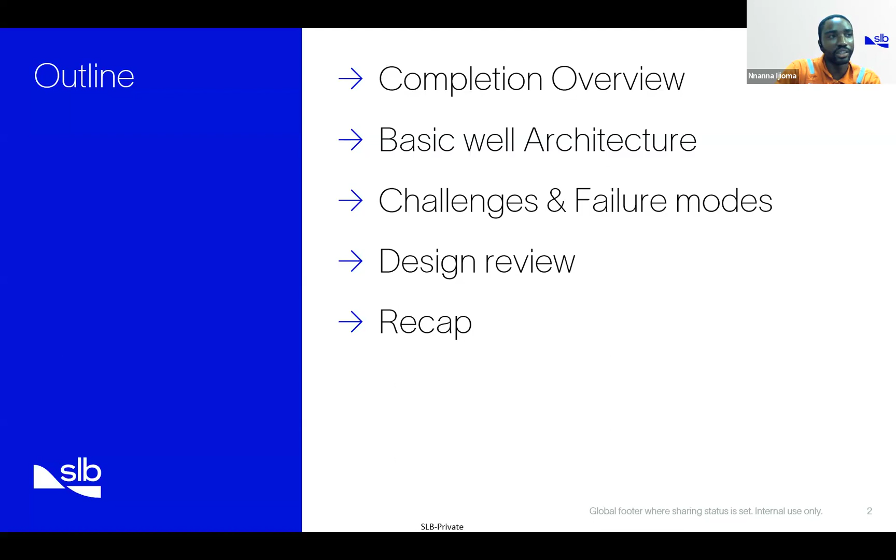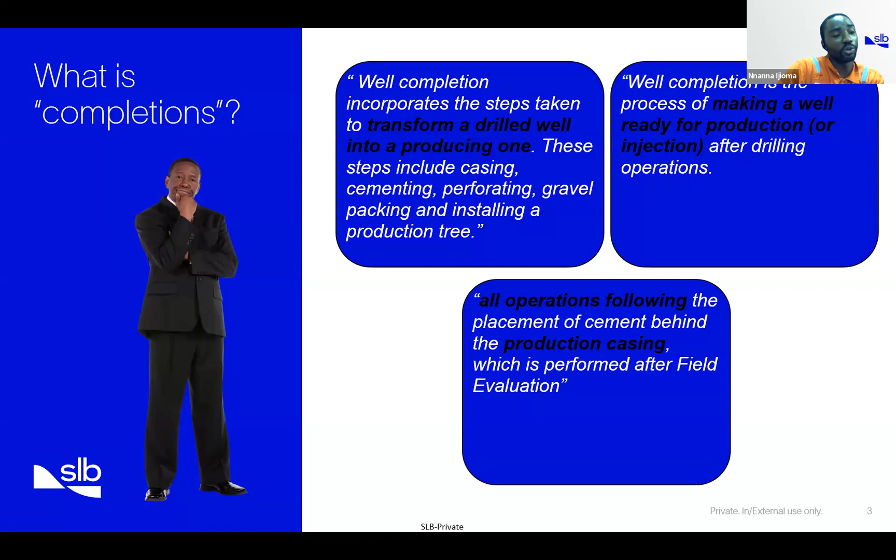So basically, what is completions? If you go online and try to see what completions is, you probably get 100 definitions, but at least you'll see one of these. You could say completion incorporates the steps taken to transform a drilled well into a producing one. These steps include the casing, cementing, perforating, gravel packing, and installing a production tree. Or you could see something that says well completion is the process of making a well ready for production or injection after drilling operations. You'll see another thing that says all operations following the placement of cement behind the production casing, which is performed after field evaluation. Basically, the essence of all of these is that it is the process of getting the well ready for production or injection in a nutshell.

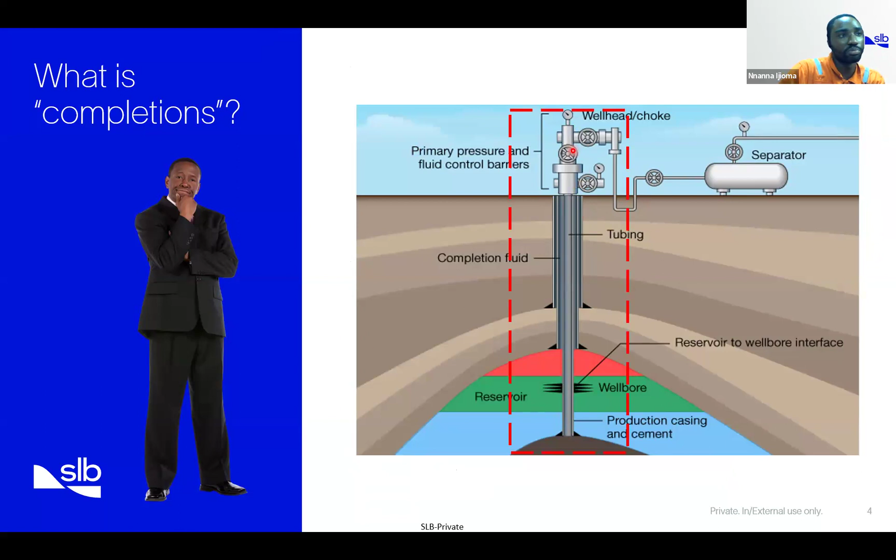So this is the area that we're talking about, all the way to the Christmas tree. The completion does not stop until you've landed the Christmas tree. Then you can hand over to the production team, and they can hook up the flow lines and do whatever they like. Now let's quickly run through a basic well architecture or completion design.

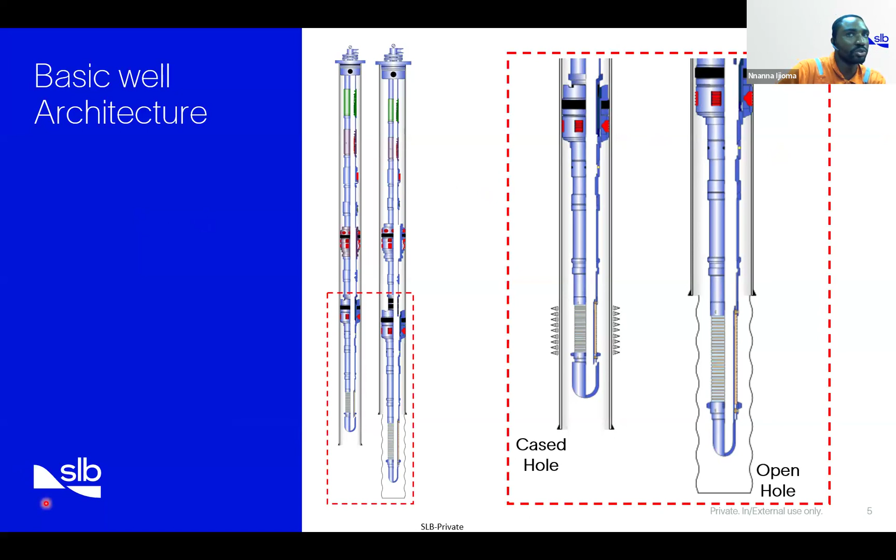Due to this, it could come in different flavors. We could have cased hole or open hole type of completions. Due to the peculiarities involved in installing these completions—because if you want to gravel pack, or do a certain type of treatment across the reservoir or perforation, or the open hole—you would like to separate them into two, the lower or the upper completions. That's what we typically do. You could have various intermediate zones, but in terms of the rudimentary aspects, you can separate it into lower or upper.

So the lower completion is basically your interface with the reservoir. At this point, it gives you the opportunity—if you want to do a gravel pack, stimulation, a frac pack, pump a micro emulsion breaker or mud solve—to treat your reservoir. This is the opportunity that you have in your lower completion.

So that's why your lower completion is your interface between your well bore and the reservoir, okay? While the upper completion is now the interface between your lower completion and the surface, or your Christmas tree.

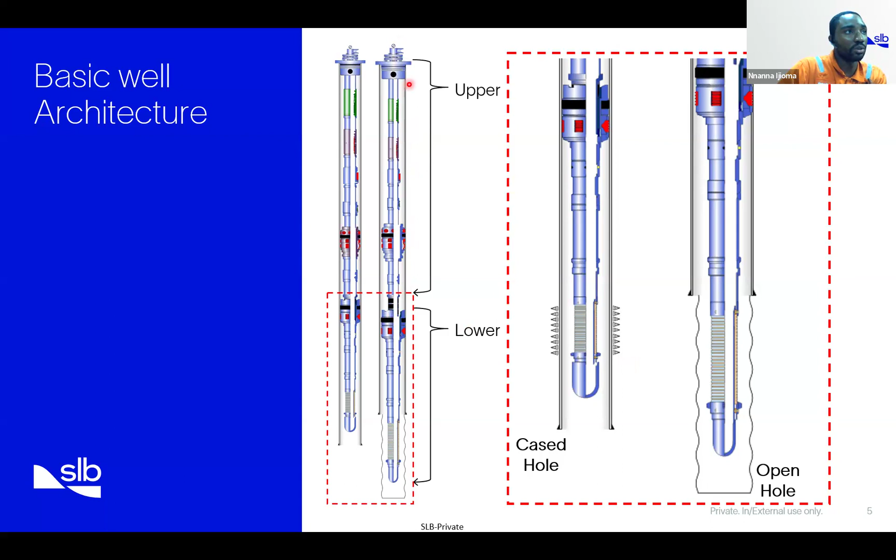Typically you would have things like packers in your lower completion and screens. In your upper completion, you have things like nipples, injection mandrels if need be, gauges, sliding sleeves, safety valves, and definitely a tubing hanger and Christmas tree.

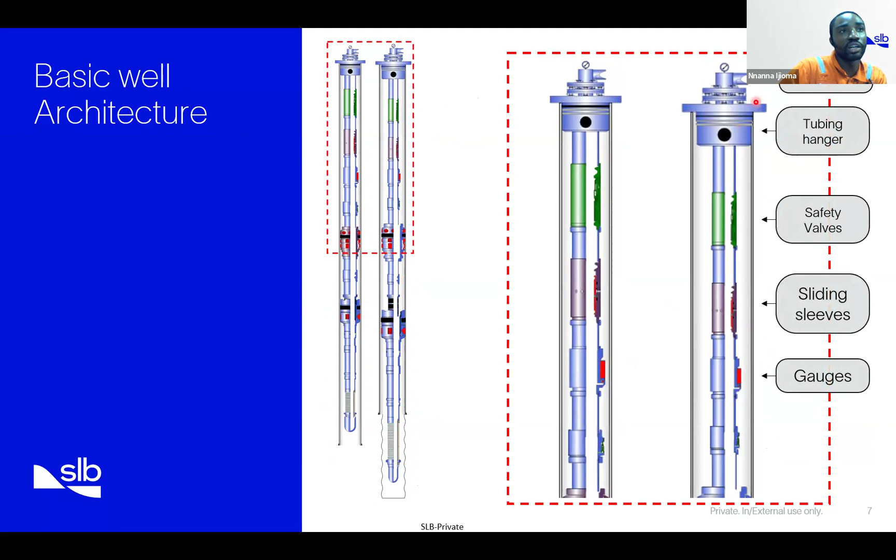Now that's for a basic completion design. But in the process of designing and deploying, or probably undergoing intervention in any completion operation, what are the potential challenges and failure modes that we could actually see in this process, and what can we do to prevent this?

So now, to make this easy, I've split it into 5 segments. Either you're planning to complete a well, or you are at the installation phase of your well, or you are at the production phase of your well, or you are trying to intervene in the well, or you're probably trying to decommission or plug and abandon your well.

So the idea of this presentation is that hopefully everyone on this call will be able to take out 1 or 2 things that will help them at each stage of the completion life cycle, okay? And so we can just get straight to it.

Now, for the planning phase, what happens? Maybe the geoscience team informs you of their intended production strategy. They've told you the economic conditions of the company, and they've also told you what they stand to gain or what they probably stand to lose.

So they've told you how they would like to isolate these zones. Let's, for sake of argument, assume that this is subsea, like deep offshore. They also told you the anticipated reservoir fluid characteristics, and the rock mechanics that they anticipate, whether it's unconsolidated or consolidated sand, etc.

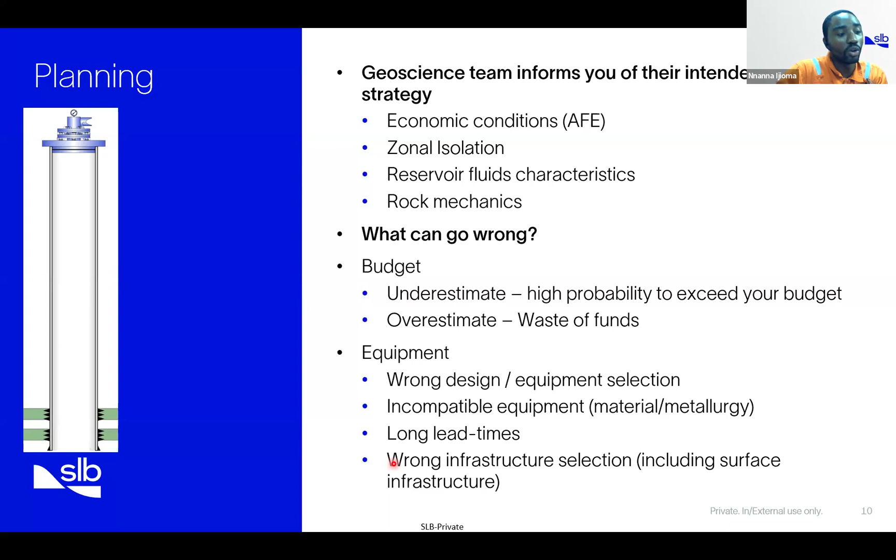And if that is the case, then you probably damage all the equipment and everything is just going to be a waste. So what can we do better at this stage?

First of all, you need to have a design review with all the parties involved. You need to ask the right questions, select the most feasible and accurate or adequate design. And when I mean adequate design, you need to make sure you have the right information.

I'm talking about your reservoir information, core sampling information, your DST, because you need to know whether you are anticipating a high water cut or high sand production. So you know whether you are probably going to gravel pack or go with a standalone screen, or deploy inflow control devices.

Next is your tubular design and analysis review. You need to be sure that your completion envelope can accommodate all the activities you'd like to do during the life of the well, because if you exceed this, you would actually have some failure on your well.

Then you need to look at installation efficiency. This means looking at how long it will take you to deploy what you want to deploy, and if there are faster ways to do what you actually want to do. We'll talk more about this during the course of this presentation.

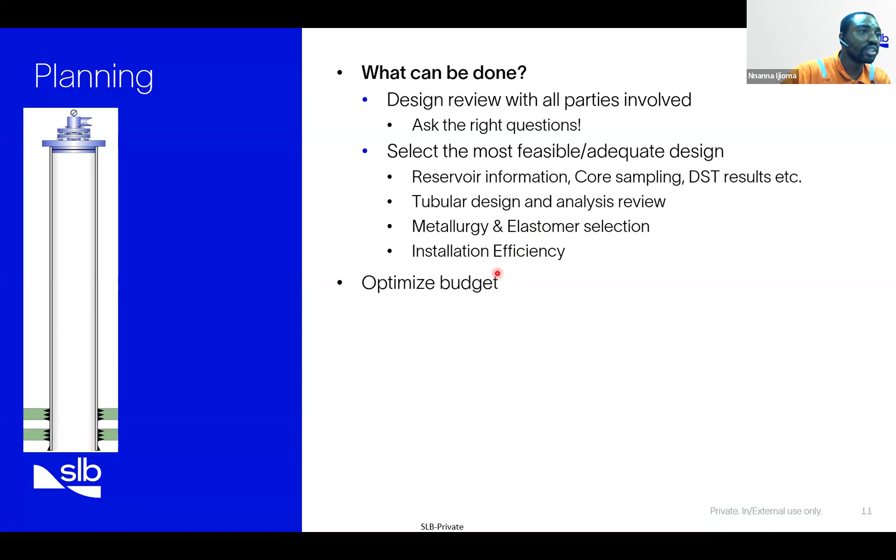Next is your equipment checks. You need to order equipment on time in the right quantities, and then conduct system integrated tests if need be at the design phase, so you know if things are compatible in the first place. You also need to check the kind of companies that need to render a certain service, and encourage the vendors to conduct rig visits where applicable.

So the moral of the story here is: do not rush, because at this stage it's actually very, very critical. Everyone knows that a lot of times we spend a lot of time planning the job. You could actually use a year to plan a job that's probably going to take you maybe a week and a half or two weeks to execute.

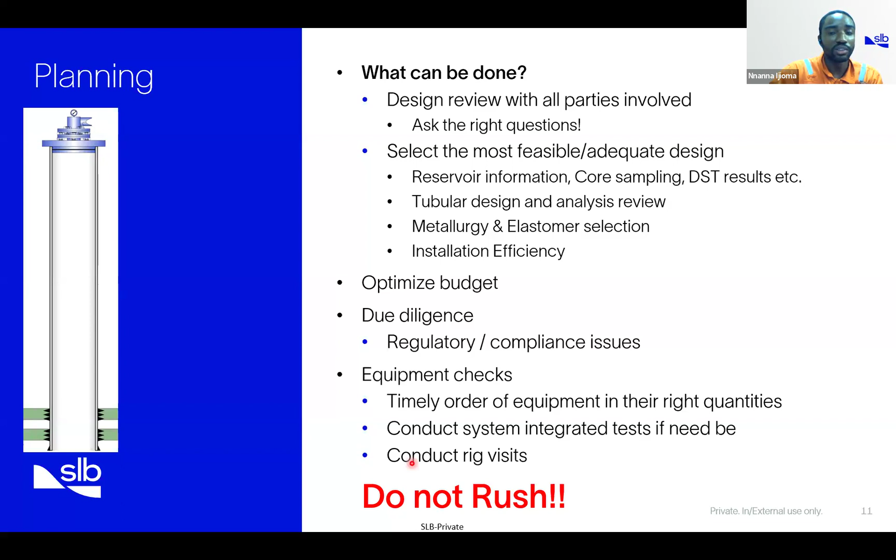So now let's move on to the next stage. You have secured everything - all your resources have been secured, your rig, your completion equipment, your vendors. At this point, what can go wrong? First of all, loss of lives and property. Safety is everyone's priority, and things can actually go wrong at this stage.

You could have stuck tools, you could have formation damage if you select the wrong tool and if your procedures are actually wrong. You could have cases whereby you do not even have a contingency plan available. So let's say your primary plan was to set the packer with a trip saver mechanism, a hydro trip, a formation isolation valve, and it just fails - so what do you do? Do you have a backup plan in place? You need to make sure your design takes into account that kind of scenario.

Another thing that could probably go wrong is your tool might damage in transit, or it might even damage during deployment. And then another thing that could happen is a dropped object in hole. In fact, all these things could probably even lead to you junking your well, so you've just wasted a whole lot of money. Because before you even complete a well, you must have gone as far as drilling it, and you've spent a whole lot of money. So at this point, you do not want any of these things to happen to you, because you could waste all of that time and money.

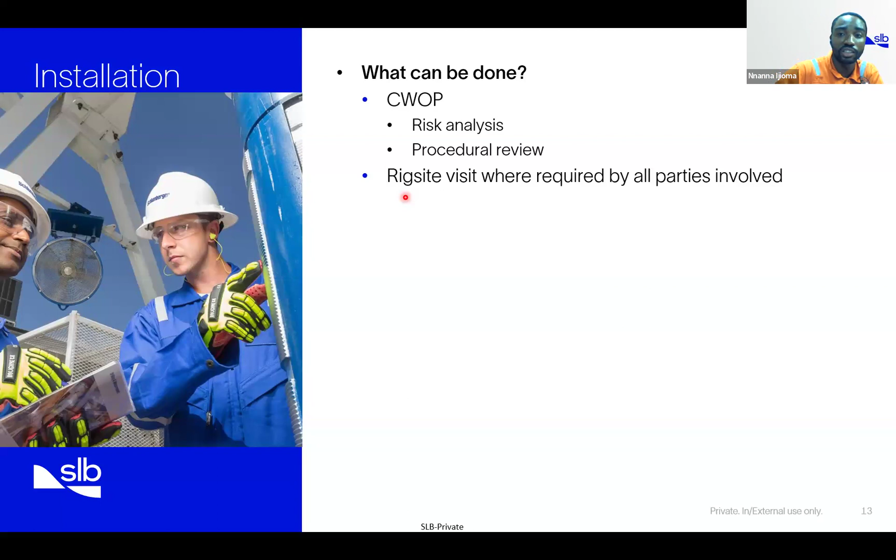Now you need to select the right service tools by assessing the impact of each tool on the performance of flow assurance of the well. There are tools designed for you to use in a cased hole setting, and there are tools designed for use in an open hole setting. You would not like to use one for the other, because you could end up damaging your formation. In fact, sometimes you could even end up having a stuck tool again. You do not want any of these two.

Next thing you should do, you should have robust plans to have backup equipment in place. Not just backup equipment, backup personnel.

Next thing, you should ensure you have adequate time allocation for equipment preparation. You don't say, okay, I want to complete a well in a month, then you go start engaging all the vendors 2 weeks to completing the well, right? We are trying to complete a well here, we are not trying to sew cloth for a wedding. Even if you want to sew cloth for a wedding, you don't engage the tailor 2 days or a week before then, right? You engage them. Some people go as far as maybe 3 months before the wedding. So if you could do that for a wedding, for an event that you're just going to sit down and eat and drink and enjoy yourself, why can't you do that for this kind of situation?

So the moral of the story here is you need to ensure you have adequate time allocation for equipment preparation, okay? Another one is you need to ensure that you have a clear and documented communication channel, all right?

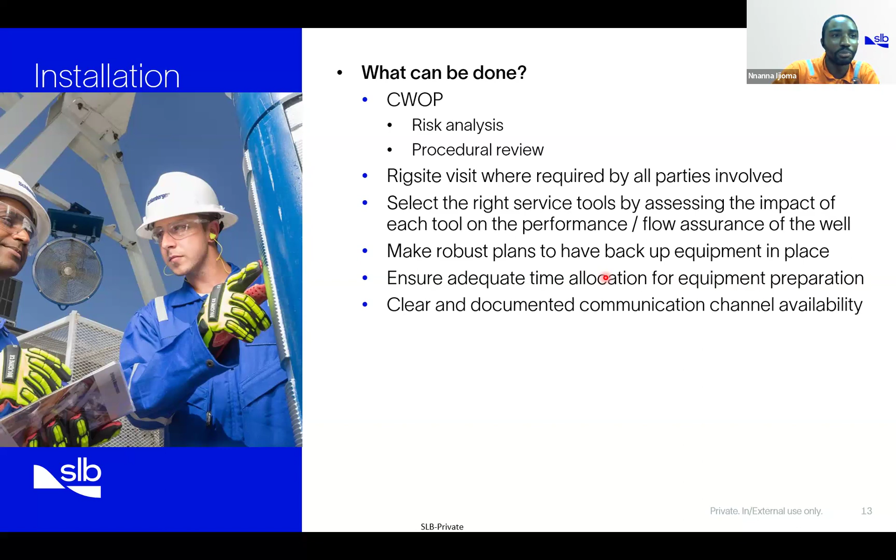Because information at this point is very, very critical. So if you have PSD results, you would like to share this with all the parties involved. Let them know all this information, so they select the right type of screen, right?

Or maybe if you're expecting high pressure in a certain operation, do not isolate all the vendors from each other. Let all the vendors talk to each other, because maybe, for example, you have an operation that will need you to pump in 5,000 psi in the string, and then you're mobilizing equipment that can only give 3,000 psi. So do you shut down the rig just because a cement unit cannot provide up to 5,000 psi? So you would like to know all of these things way ahead of time.

Now another thing is to ensure that all associated records are available and well documented. Again, I'm talking about the things on the rig, your drill pipe specifications, tubing specifications, equipment specifications, pumping equipment specifications, right?

So for example, the reason why your drill pipe specification is actually important, because if you're going to do a gravel pack operation, you would like to know how many barrels you're going to pump for proppant to get to where you want the gravel packing to actually happen. Just to put things in simple terms, if you get this wrong, believe you me, you could seriously and heavily jeopardize your operation. And this is just at the installation phase.

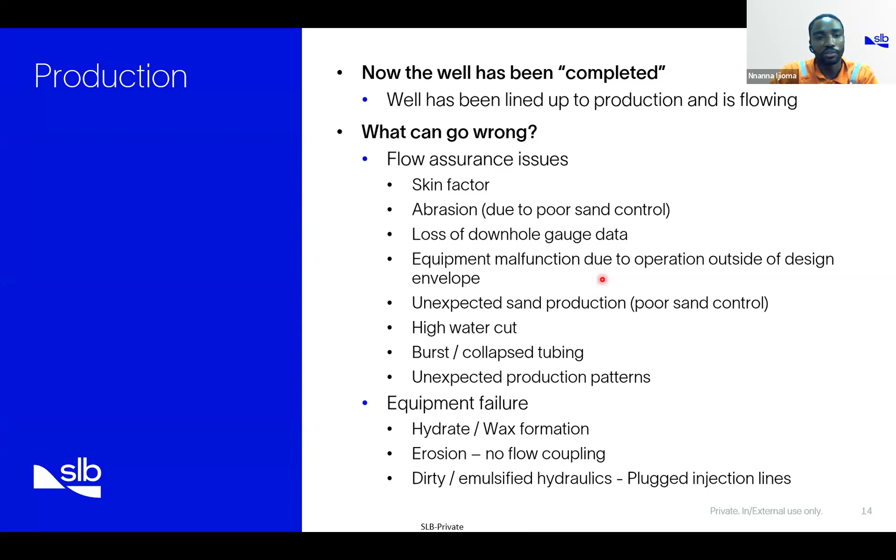So now, let's even go to the production phase. Now you've completed the well, and at this point everybody's happy, they say congratulations, everything is nice and good. So what can go wrong at this stage?

First of all, flow assurance issues, right? You're talking about your skin factor, something like this. Because of the things that happen during the installation phase, there's a high tendency for you to contaminate the contact area between the wellbore and the reservoir, basically your lower completions. And if you do not use the right tools or do the right things, you would not be able to mitigate these things.

So we have things that would help you mitigate these things, but maybe you need to just pump acid or like a mud solvent, things that will help you dissolve the mud, the filter cake, and all of those things. If you do not do that, you're going to have a high skin factor. And for those who are not really conversant, I'm basically talking about things that would restrict the flow of effluent into the wellbore and up the string.

So at this point, you'll be having, like, you see where my laser pointer is, things blocking the pores, and you do not want that, right?

And reducing permeability. Another thing that could probably go wrong is abrasion, probably most likely due to poor sand control, which could lead to pipe failure on surface.

This is just an example of what can actually happen on surface, especially at elbows. And if this can happen on surface, just imagine what's going to happen downhole.

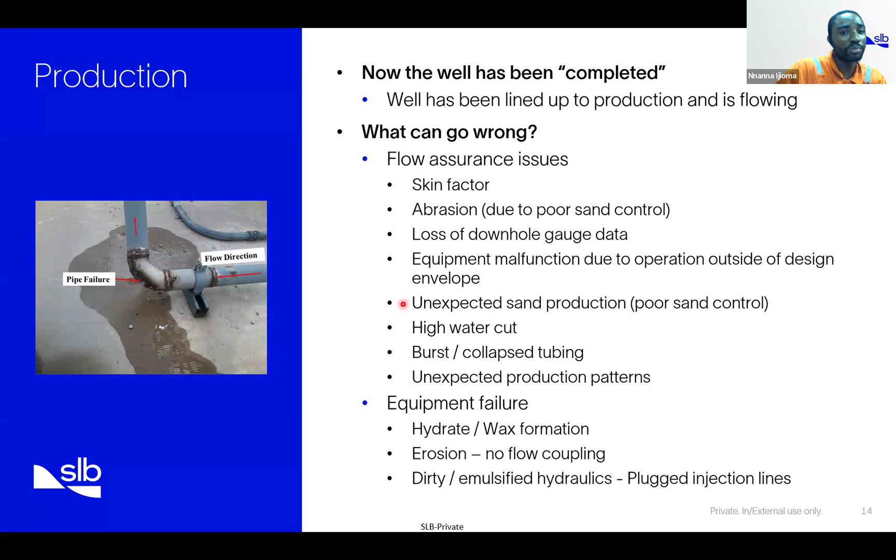You could probably have hot spots downhole, and then you start having irregular production patterns. Another thing that could happen is ballooning and reverse ballooning, which is actually inevitable, but these tubing movements will lead to equipment malfunction due to operation out of the design envelope.

You could also have loss of downhole gauge data, unexpected sand production, and then you could also have hydrates or wax formation.

So this is basically what it looks like. If you anticipate these kinds of things, there are procedures or things you could put in place to prevent them from happening, and we'll talk about that in subsequent slides. So you can take some time to digest this slide again, then let me run through it.

So you could have a high skin factor, abrasion due to poor sand control, loss of downhole gauge data if you have a downhole gauge installed in your well, equipment malfunction, probably a high water cut because you never installed an ICD device. You could have a burst or collapse tubing, equipment failure, erosion, or probably dirty or emulsified hydraulics.

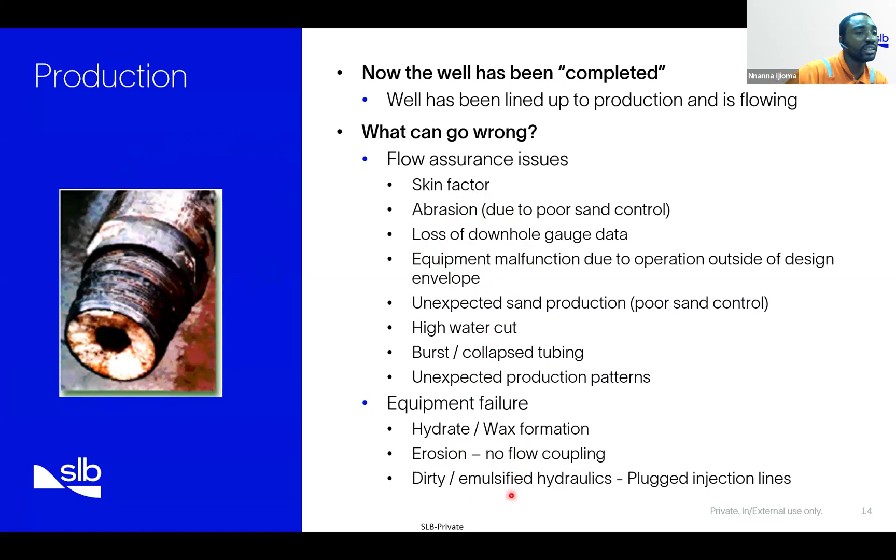Now, what can you do at this stage, or before this stage rather? First of all, make sure you have a robust completion design.

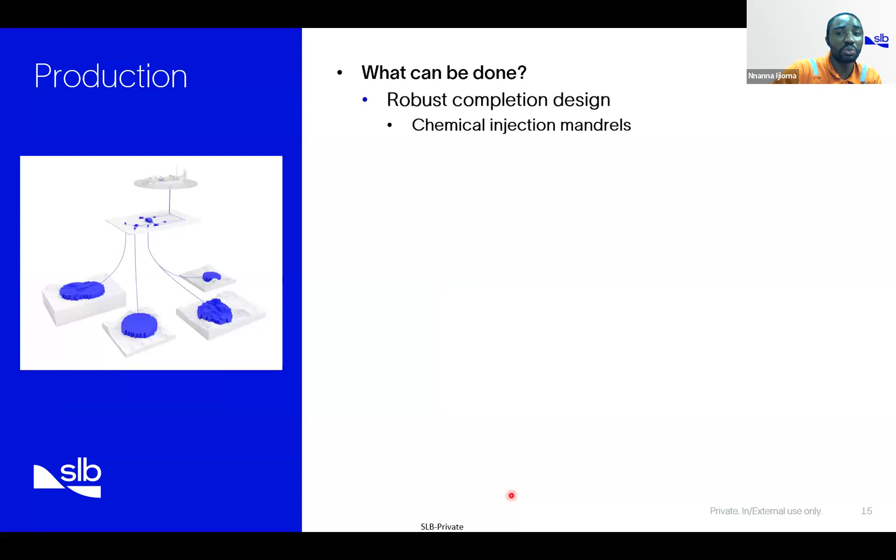Do you need to install chemical injection mandrels? Do you need gas lift mandrels? Ensure you have a robust installation procedure, and ensure you do a thorough wellbore cleanout.

And as part of your robust completion design, ensure you do a tubular design analysis. So you need to simulate what is going to happen at every point in the well. During installation, you need to simulate what's going to happen and how that is going to affect the other equipment in your well.

In fact, you need to also simulate what's going to happen during gravel pack when you screen out. There's a very high tendency for your screen out pressure to be very high, and that could actually collapse the other equipment you have above your screen. So you actually want to factor in all of these things.

Now you also need to look at your intervention and plan for these things. You need to function your downhole tools as required. Things like safety valves need to be functioned regularly. You just don't leave a well to flow and leave the safety valve open for years without functioning it.

No, you actually need to plan and schedule, let's say, an interval where you go check that your safety valve is working, that your downhole flow control valve is doing what it's meant to do, and so on and so forth.

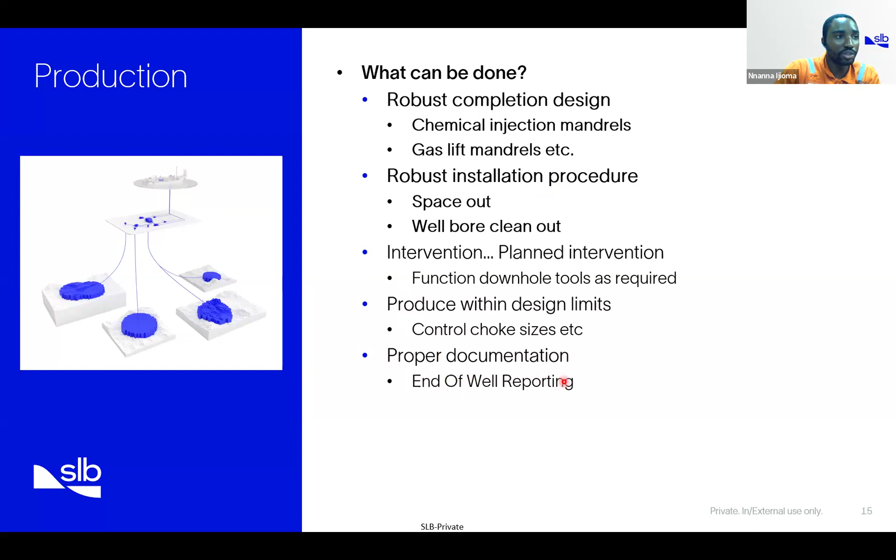Now this leads me to my next point, which is proper documentation. You need to be sure that all these things are well documented in your end of well reports, because you can only know that there is even a design limit if there is a record showing that there is a design limit.

You can only know that there was a restriction while going in hole if there is a record showing you that. So you need proper documentation. And last but not the least, you need to make sure you have the right security measures. An example is us here in Nigeria - I can tell you for a fact that we've had cases where some people's Christmas trees have been stolen. Christmas tree, as heavy as it is, can get missing. The same way you hear that a snake has swallowed some money, you hear that someone has swallowed your Christmas tree. So you need to make sure you have the right security measures in place.

Okay, so now let's talk about intervention. Intervention can happen at any stage during your installation or after. So at this point, what can actually go wrong? You could have a whole lot of NPT if you do not prepare. In some cases, you might have completed the well - it might be an old well, but you might have insufficient well information. And if you have insufficient well information, this might lead to a stuck tool, because intervention is not just wireline or slick line - we're also talking about coil tubing. You could have a stuck coil tubing BHA in hole, a stuck wireline BHA in hole, a stuck slick line BHA in hole, and you don't want any of these things to happen to you.

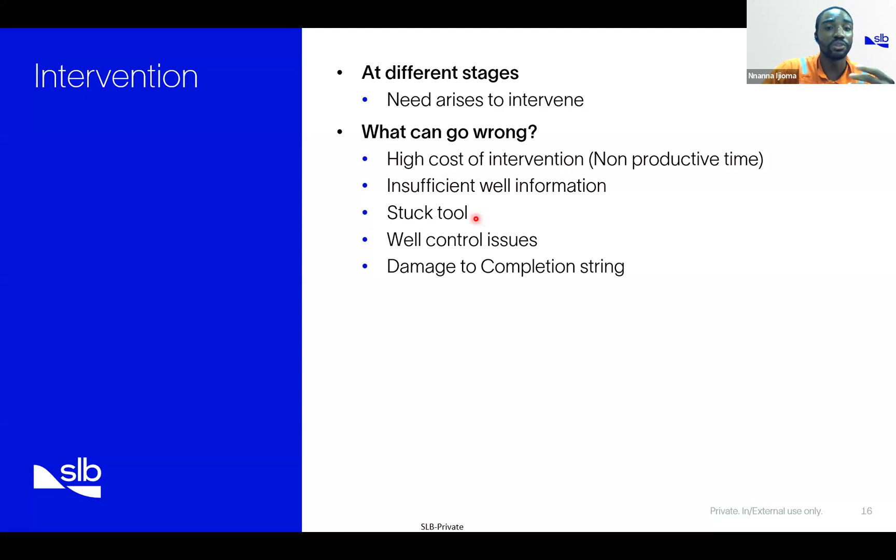You could also have well control issues, or maybe damage to your completion string. But at this point, what can you do to prevent any of these things from happening?

First of all, make sure you have a robust intervention design. Select downhole tools which require little to no intervention, if possible. Ensure the well is designed to accommodate all anticipated intervention operations. And then you also try as much as possible to have a robust intervention procedure. First of all, you need to always perform a drift run before anything. In fact, you'd prefer to even lose a gauge cutter in hole than lose an entire stimulation BHA in hole - you don't even want that.

You also need to expect the worst and plan for the worst. And then, again, ensure you have a proper end of well report.

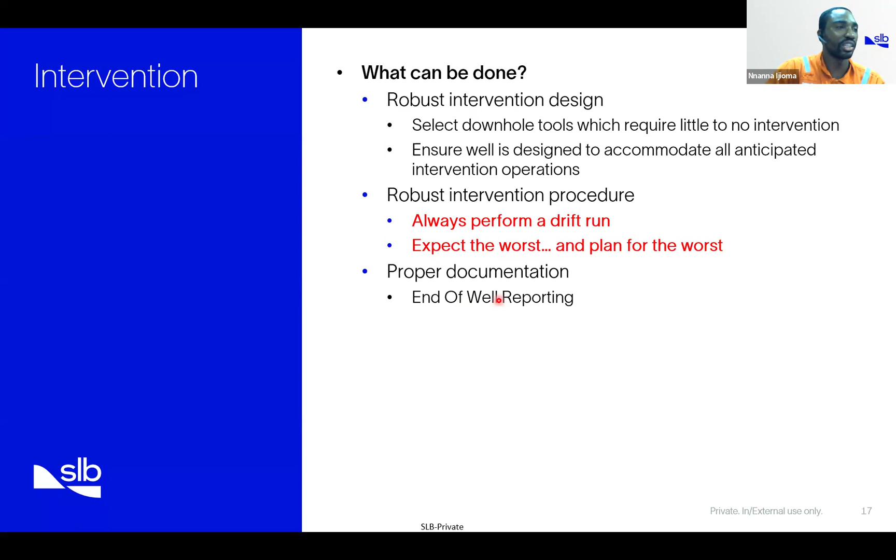Now, after you are done with your well, you have exhausted everything you can get from that well, you are in the decommissioning phase. So now there's a reason to decommission the well - you need to plug and abandon this well. So what can go wrong? First of all, well control issues. As funny as this may seem, you might even exceed the decommissioning budget. And there's also a risk of having a stuck tool again, or you could probably even have seepage after your plug and abandon operation. So what can be done at this point?

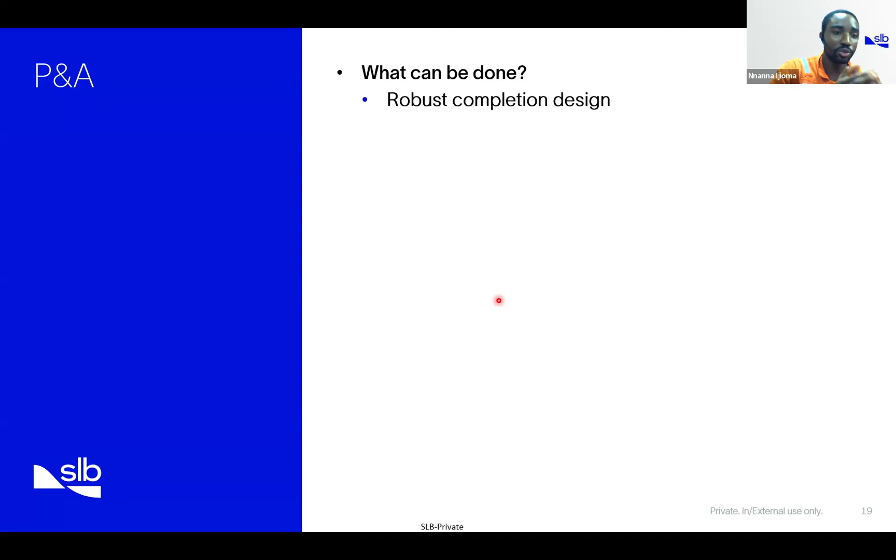First of all, make sure - and this is me repeating this again - make sure you have a robust completion design. Sometimes you can design your well in such a manner that it will be easy to decommission. These are things we are going to look at when designing our well in the upcoming slides. Next, make sure you probably introduce a failure point in the well, so that when it's time to decommission, you can either shear that part out of the completion tubing string, or go out there with a BHA, tag that setting point, fire some guns or an EGC, and pull out of hole the remaining BHA.

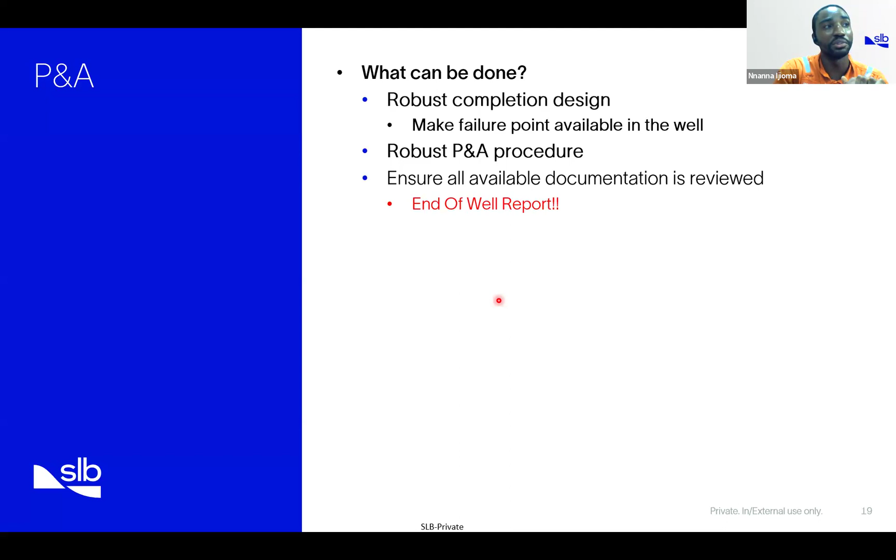Make sure you have a robust plug and abandon procedure - again, similar to having a CWOP. You need to do something similar in this operation where you come up with a procedure that helps you account for all of these things. And last but not the least - this should be the new national anthem now - ensure you have your end of well reports, and ensure all available documentation is reviewed before the operation. In fact, before the intervention operation, ensure you review all available documentation.

Now, let's try to design our well. Remember previously they told us that they wanted to complete a well deep offshore, and they have 2 zones that they wanted to complete, which are not so far from each other.

So first of all, you could do something like this. If this is not so visible, let me zoom in so you can see. You could just run a single string, right? This would be our option 1.

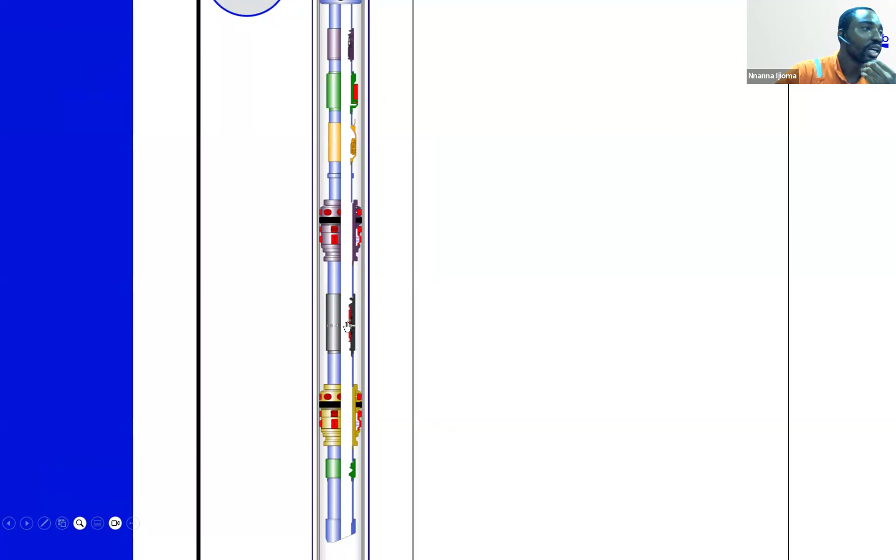You could run in hole, set a packer. You're going to have a packer here, a packer here, introduce a nipple here that enables you to have a closed system and set these 2 packers at the same time. Then you put a sliding sleeve which enables you to access the formation over here, and the lower formation will flow in through this flow port here. So now you have selective production, right?

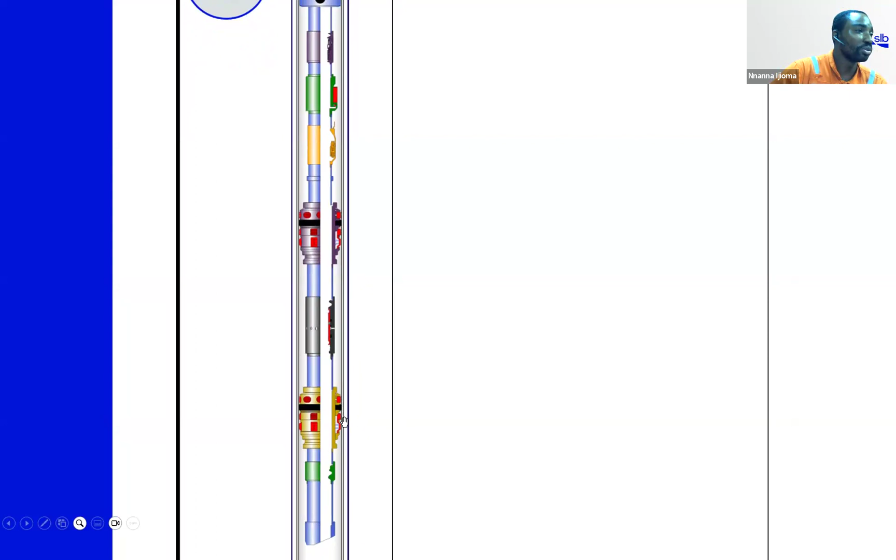But the reservoir team or geoscience team has also told you that they expect sand production from here. So you cannot even gravel pack in a single trip. I mean, it's not that it's not possible, it's actually very possible, but you do not even want to do that. Because if you do something like this, believe you me, it will be a nightmare. It might be quick to deploy, but when it's time to produce this well, it's going to be a very, very serious nightmare because you will start producing sand.

And even if you start producing sand and it's time to decomplete this well, and you want to pull out this completion string, guess what? You're going to have problems because now this packer here might even get stuck because of sand. So you want to do something that is more robust.

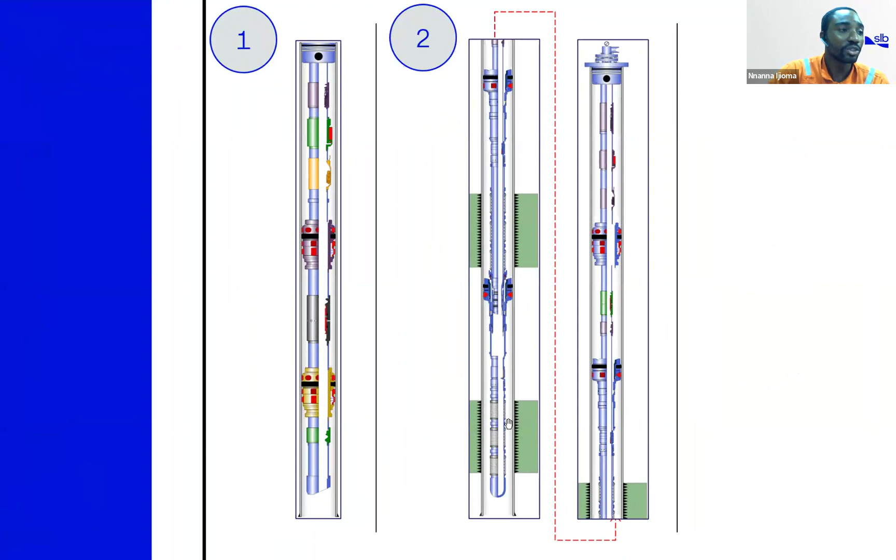Let's take our option 2. In this case, we are going to introduce a lower completion BHA, which alludes to my previous slide, where we try to separate the upper and lower completion because we want to do a gravel pack. So now this is what our BHA, our completion BHA, now looks like. Let me zoom in a bit so you can see.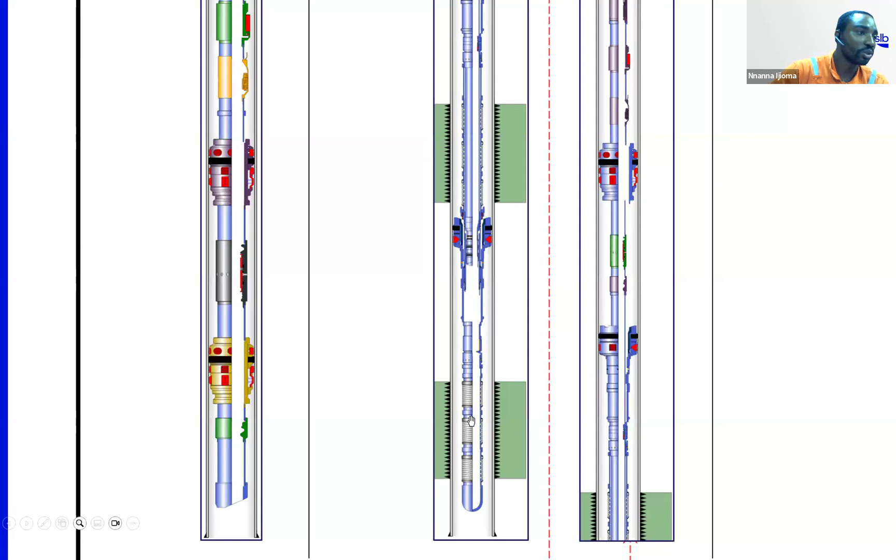So we're going to have a packer here, right? With this packer BHA, you're going to have a bull nose here, leaving some rat hole. At this point, we are not even sure how long our rat hole will be. So now we set this packer, do our gravel pack operation, come in with the upper zone lower completion BHA. We sting into this first lower completion BHA. So now we're going to have a stacked lower completion, like a 2-zone lower completion. Then we do our gravel pack, right?

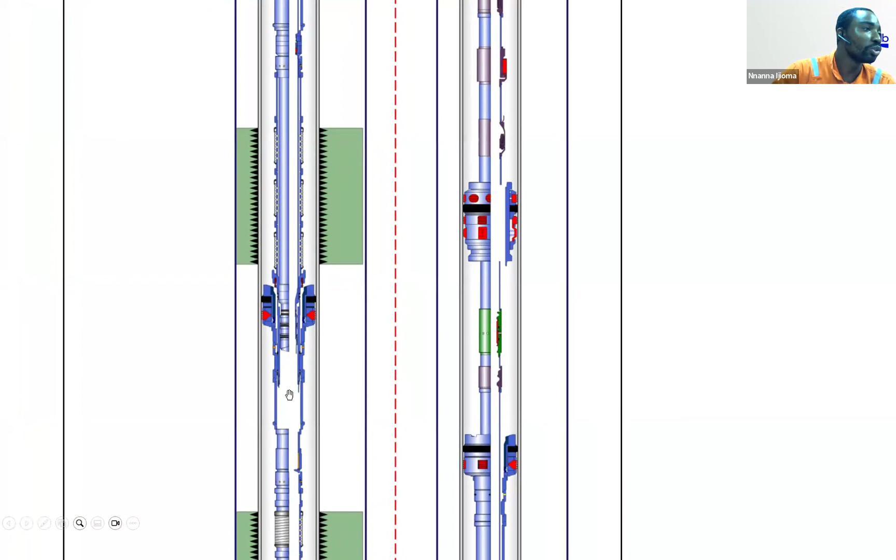And then we come in with our upper completion BHA, which is almost similar to the first iteration. In this case, we would like to either produce from this zone or this zone. So what do we do? We come in with our seal assembly, sting into our LZMSA, lower zone multi-seal assembly, which enables us to produce from the lower zone. And then this upper zone will now flow into these screens, into the microannulus between the tubing and these screens, out of this larger microannulus and all the way to this sliding sleeve.

But at this point, it's going to be blocked. Just for the sake of illustration, let me zoom out and use my pointer so people can actually see what I'm talking about. If you follow the red pointer, the lower zone will go all the way up here into this point, coming through here, then go up to surface, while the upper zone will come into this point, come out of this annulus here, then try as much as possible to go into this sliding sleeve.

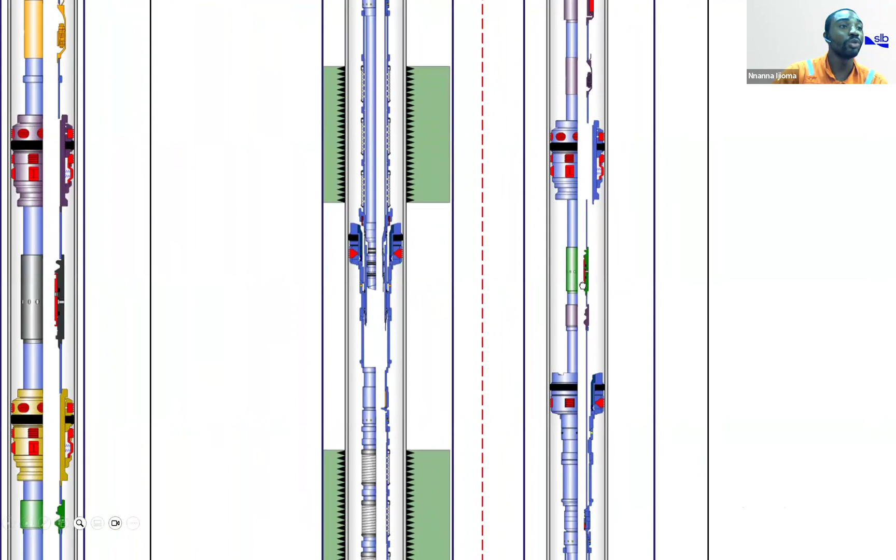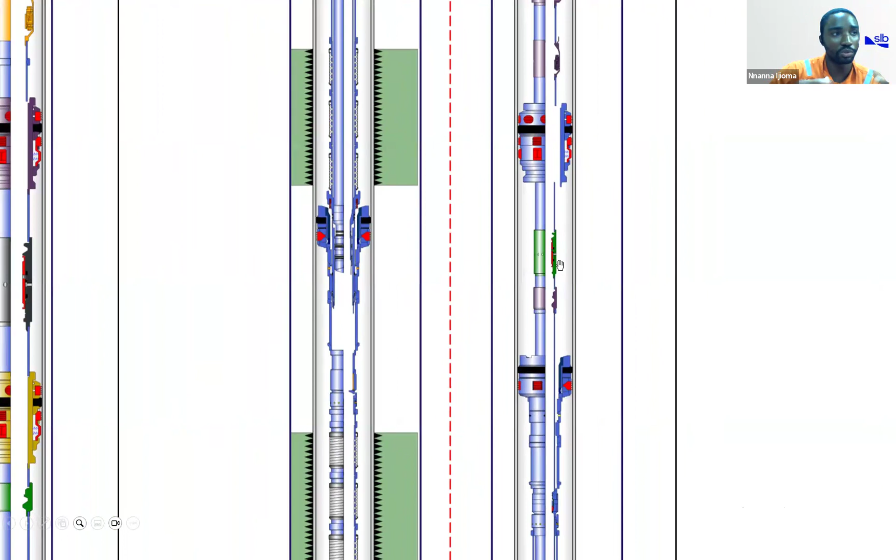But it wouldn't be able to, because the only way you can do that is if you call slick line to come and shift it open, for the fluid to come into the string. But we are in Nigeria, you can't do that. You can't commingle. And even if you want to do that, you first need to come in with a plug, set it in this nipple profile here, and then shift open this sliding sleeve so you can have production. In fact, you need to then put a separating tool in the sliding sleeves, then have selective production.

But then again, you are in a subsea environment. You don't want to be calling slick line, calling a drill ship just because you want to have selective production. We can actually select a device that will limit or reduce the number of interventions required in this well. So we can come up with a third iteration, and we can also use this to reduce the number of runs in our lower completion BHA. So now we have modified it to have something like this.

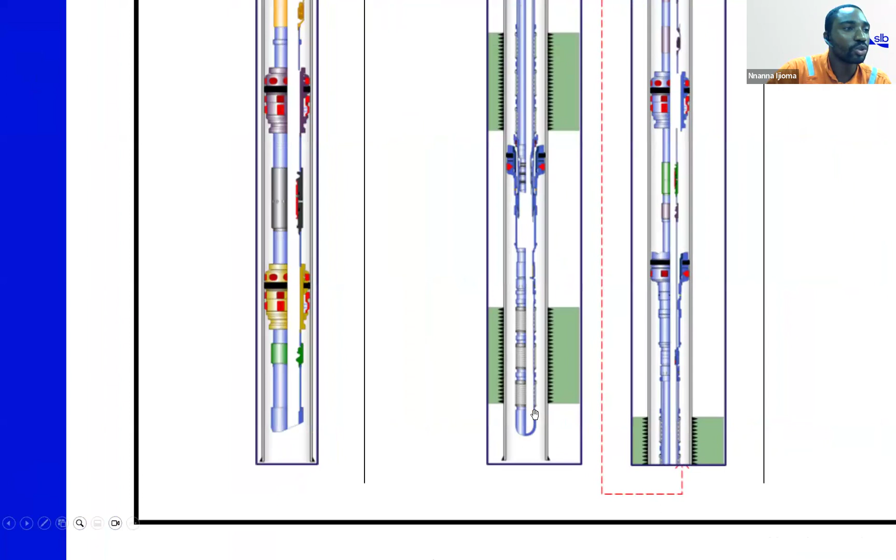So let me even make this third iteration bigger. Now we're going to have something like this. Okay.

Now let me come in with my laser pointer. So now we have a 2-zone lower completion BHA, what we call an MZ completion. In one trip, we'll be able to complete the 2 lower completion zones, that's the upper and the lower zone. We're able to gravel pack both zones at the same time.

Okay, so before I zoom in, let me show you something like this. Basically it's going to look like this on this third slide. So in one run, you'll be able to deploy 2 packers in one lower completion run, and then you sting it to a sump packer, right? Because you can't predict the kind of rat hole that you're going to have.

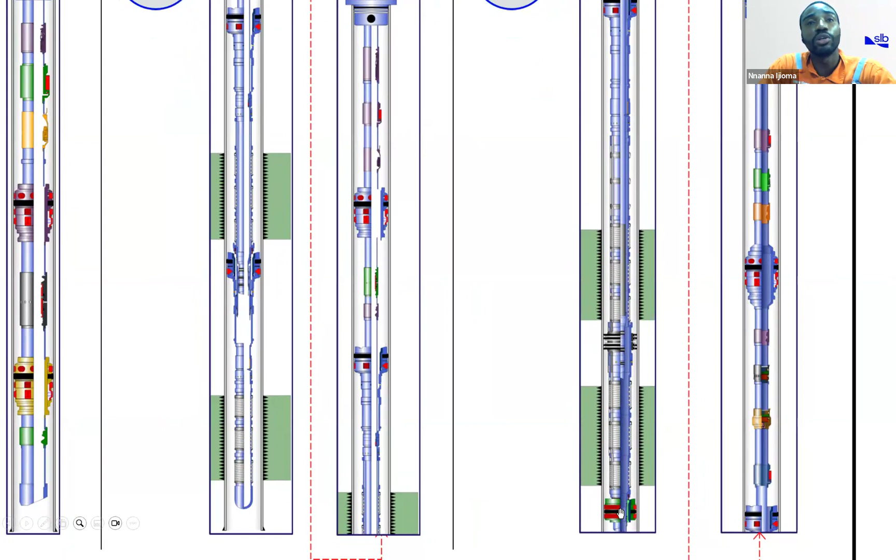And again, you also want to have an efficient gravel pack, so it's recommended that you put a sump packer there, which you deploy using wireline. It's going to be very, very quick. So now you sting into that sump packer, and in one run, you'll be able to gravel pack both zones with this MZ packer.

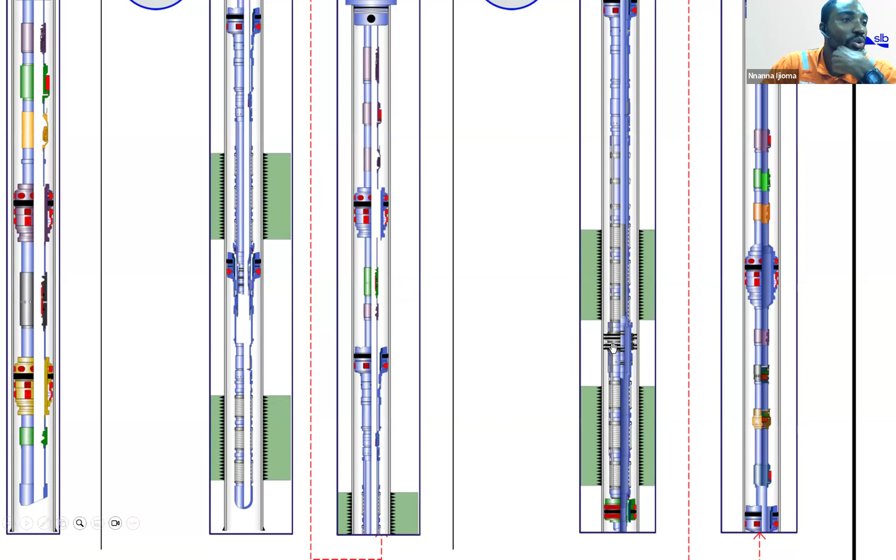Then in a similar fashion, you'll be able to sting into this lower packer here and produce the upper zone via the micro annulus and the upper annulus. But now at this stage, we are not going to be using a sliding sleeve. You can introduce a flow control valve, something like this, right? You put an inline flow control valve and an annular flow control valve.

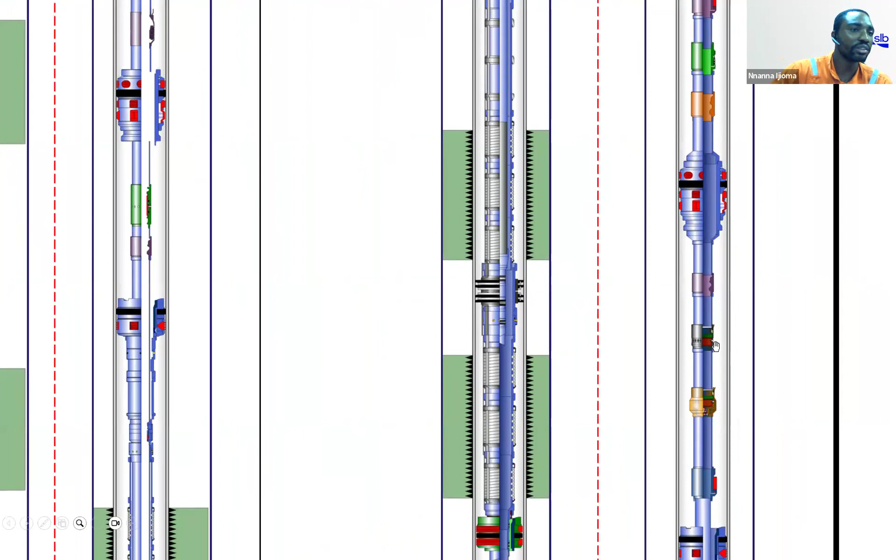Now you can remotely actuate these things to either shut the lower zone or open the upper zone, and then you have a two-way gauge, that's a tubing gauge and an annulus gauge, that will enable you to get your reservoir parameters from both the lower and the upper zone.

And then now we are thinking about decommissioning the well, so this will be a permanent packer or a cut-to-release packer. You can put a nipple here that will enable you to locate, okay, and cut this packer to release. So now you have a robust completion design.

And also you're going to have a gauge here that will enable you to collect your upstream data, that is above, maybe you're trying to commingle because you've been able to meter both zones. So you could actually have a gauge that will enable you to get the commingled pressure downhole.

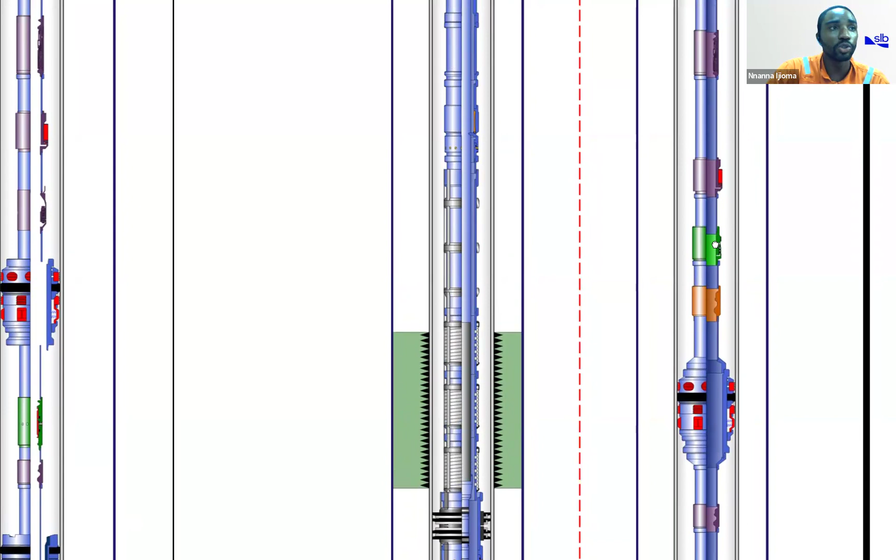And then you can introduce an injection mandrel because, hey, you are offshore, so you actually expect certain things like hydrates, maybe wax or whatever. You can actually use this as an inlet to inject chemical into this tubing string that will reduce the probability of formation of those things and increase the lifespan of this well.

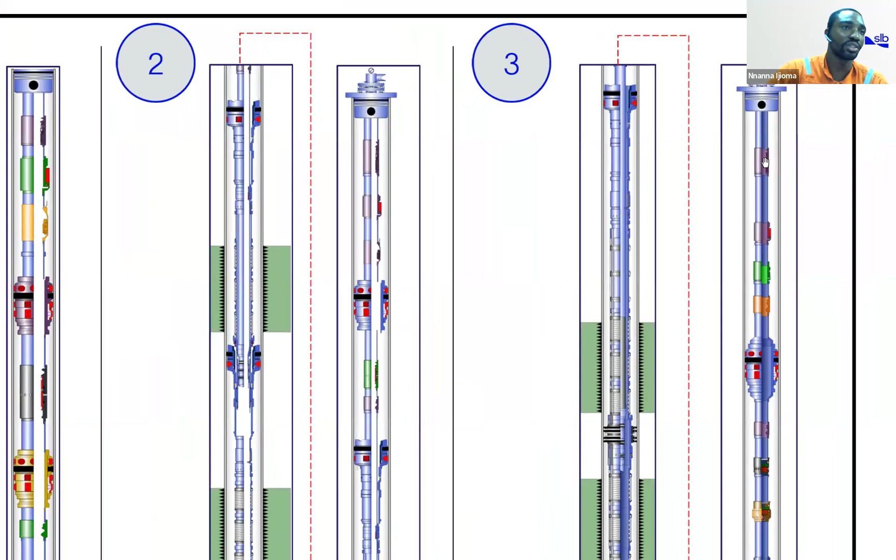Okay, and also you must have your safety valve in your tubing hanger, right? So that's for our design review. You can just take some maybe 5 seconds to digest this slide, take a screenshot if you like.

Now just for a little recap, we just need to take away these 5 points. First, always conduct an extensive design review at every stage. Always ensure that all operations are conducted within the equipment design envelopes. Allow enough time for preparation. Ensure every step is well documented and well understood by all the required parties, and ensure you have a robust, future-proof well design.

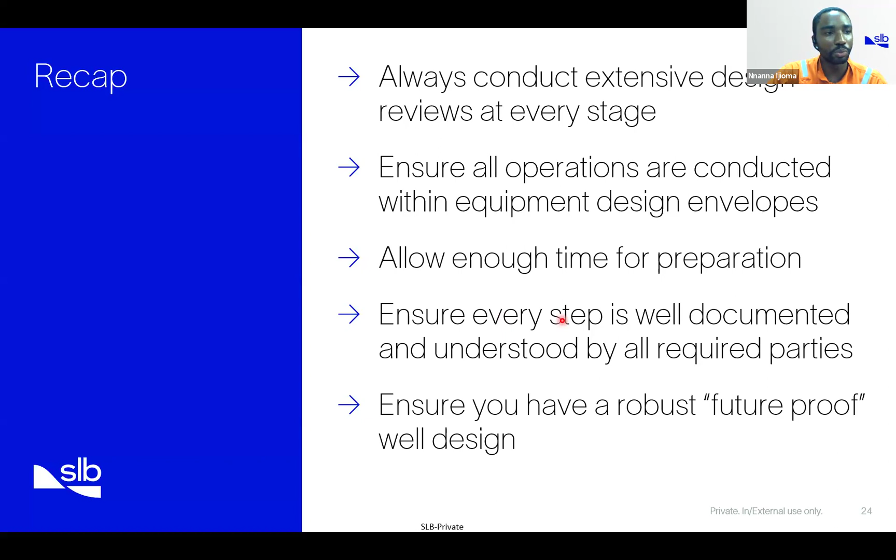Okay, so thank you for listening, and I can take your questions now.

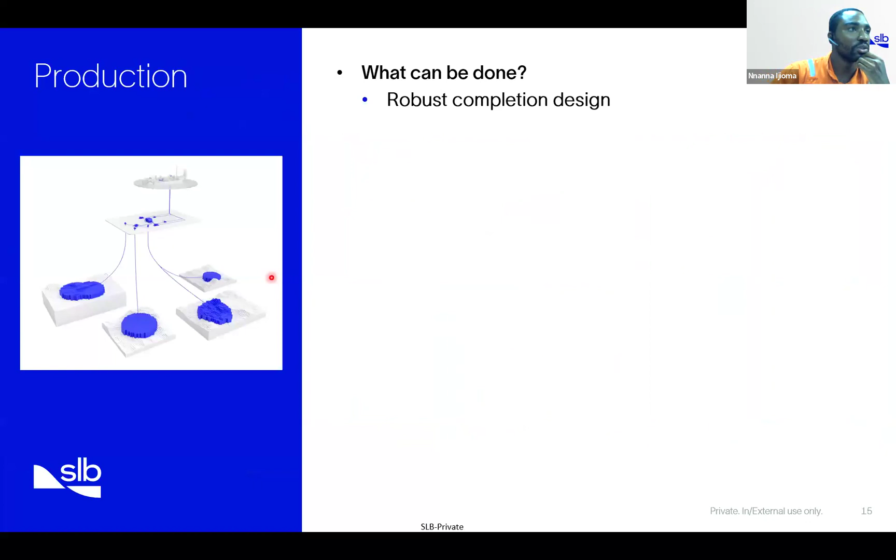While other people are trying to get their thoughts together, let me answer the first one. We've had different cases at different stages. Let me take you back to the phases, and walk you through a couple of problems we've had at every stage. So at the planning phase, what issues have we had?

We've had cases where you'd select a rig that cannot even accommodate the spread. When I'm talking about spread, let's say you want to perform a gravel pack job. We've had cases where the rig you select is not fit to accommodate all the equipment you'd need for that operation. So people have to start looking for slimmer versions of their surface equipment for the job. That's a simple one that has happened at the planning phase.

Then during the installation phase, man, there are a lot. In fact, there are cases where during the gravel pack operation, the generator goes off, and then you have a stuck tool. You could probably attribute that to poor rig site visits or poor risk assessment.

Again, remember I spoke about having a backup plan. So if you're going to inspect a rig, or mobilize a rig, or you're working for an oil producer and want to sign a contract for the rig, make sure you have backup generators in place. If you want to do a gravel pack operation, just before that operation, make sure all the generators are working, things like that.

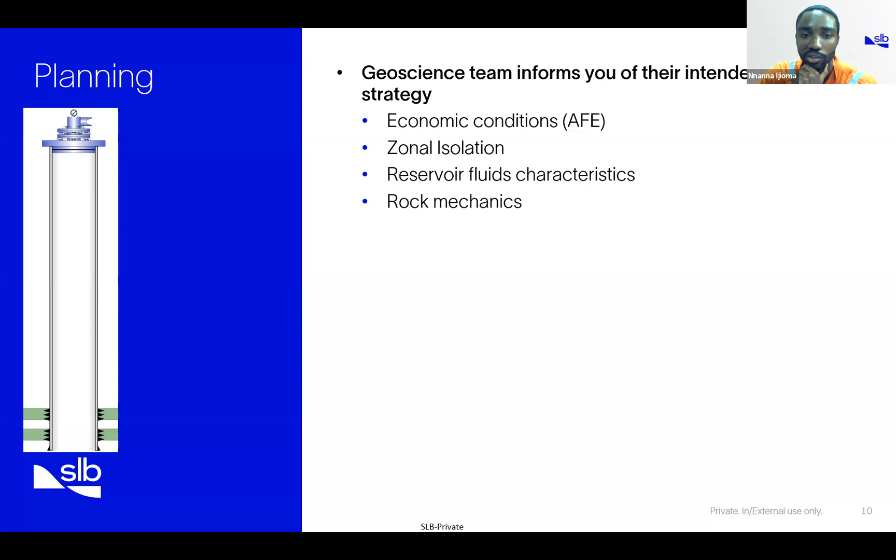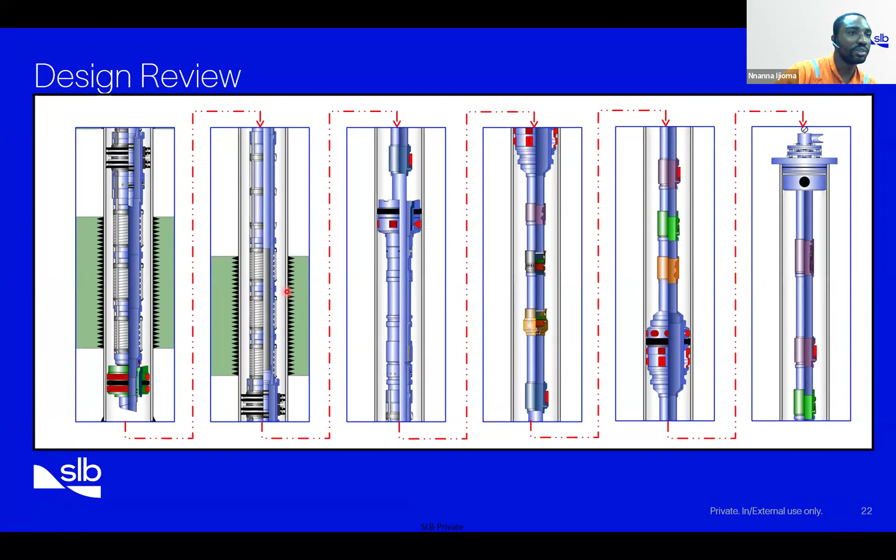So the next question says the Packer in my third iteration does not have a feed-through. How do we communicate to the downhole gauge? That's a good question, so let me show you that again. Let me take it out and come in here. I believe you're talking about this one. Let me take it back to this.

In this case, the way we'll be taking readings from this reservoir is not direct - the gauge is not going to be directly at this reservoir. You can see where my virtual hand is, it's not at this level. The gauge is going to be at this level, so you can actually deploy it there.

We have gauges that read tubing and annulus. On this mandrel, you install a gauge that enables you to get reservoir temperature and pressure from this lower zone, because as it's flowing in through here, the pressure and temperature of the fluid coming out will be detected by the tubing section of the gauge.

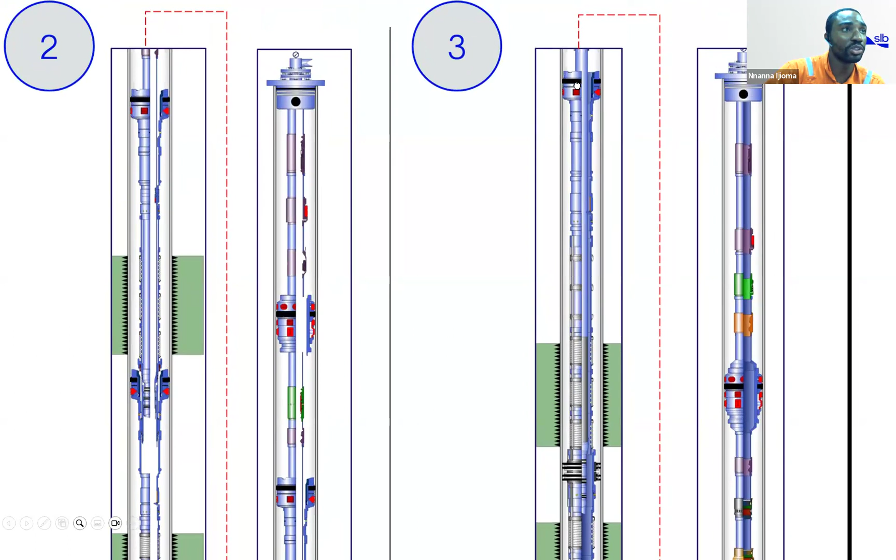And now this zone - the pressure coming out of here, believe me, you're going to have pressure trapped because you'll have a packer here, a seal unit isolating these two zones. So there's a packer here, and also a packer here. This whole zone from here to the microannulus will be the pressure of this reservoir.

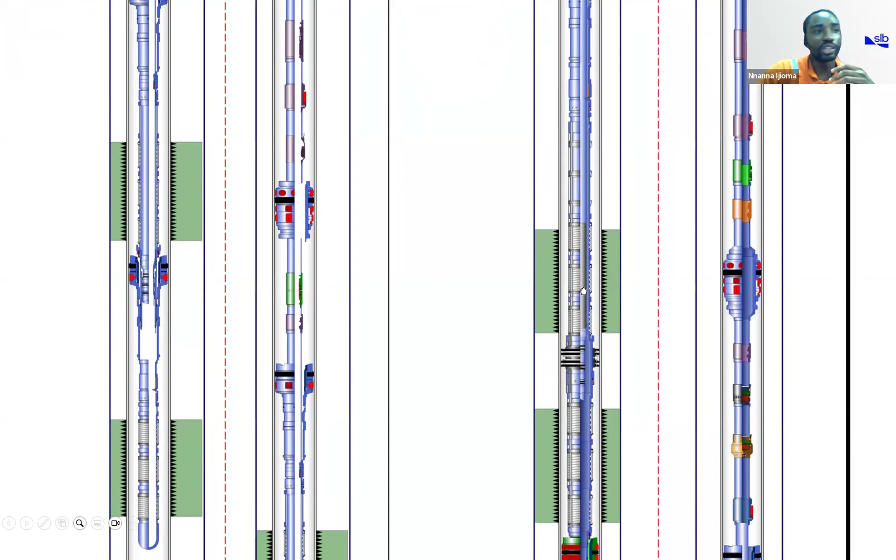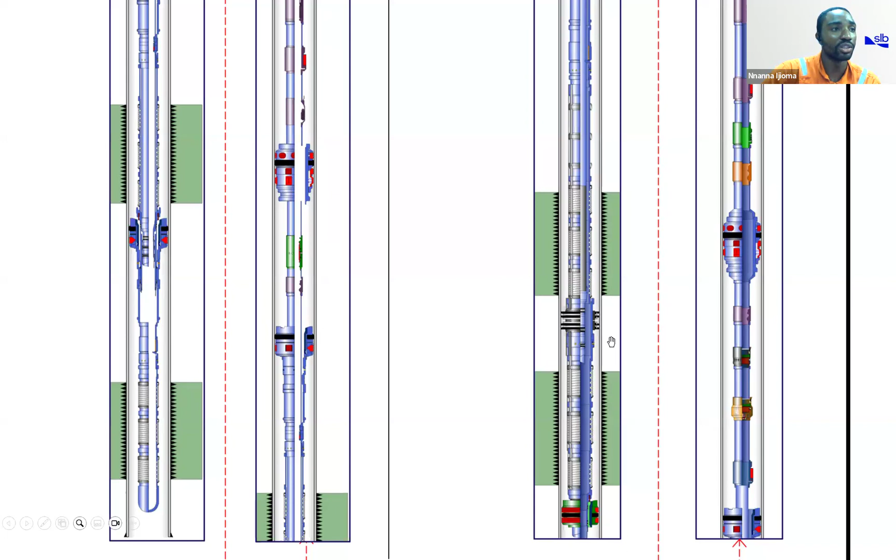So you take that as an opportunity to meter that section via the annulus section of the gauge. Now you'll be able to read the annulus pressure and the tubing pressure, giving you the pressures of both zones. You'll get the TVD, true vertical depth, where the gauge is located, and the TVD of where your reservoir is located, so you know how to calibrate your readings effectively.

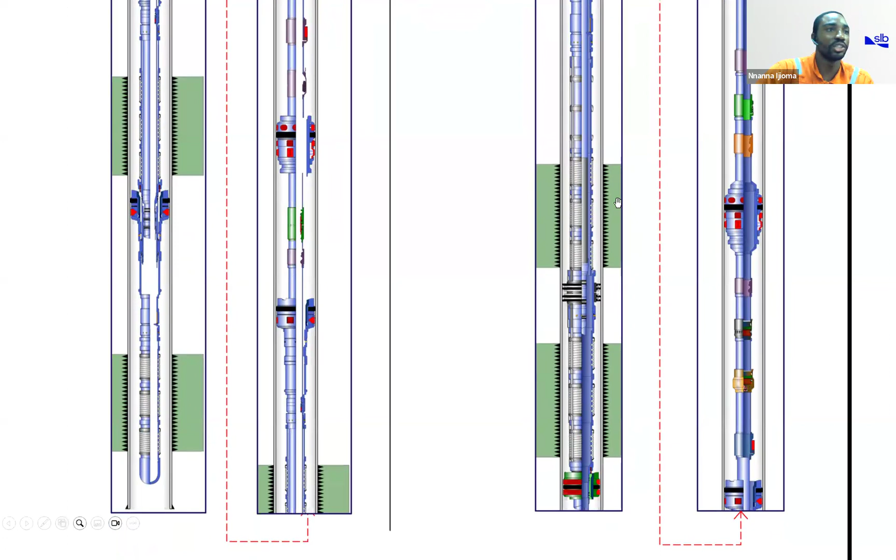So if you're expecting a certain fluid gradient across the perforation and your gauge, say an additional 10, 20, 30, 100 PSI, you could add that to whatever reading you're getting from your gauge, and so on and so forth.

Now I'm seeing another one - it says multiple zone reservoir. Kem Kama, I hope I'm pronouncing the name well - for your question, I'd like more information about the well because that will definitely require some level of intervention or something along those lines. It says, would I prefer the third iteration to a dual string completion? If yes, why? It all depends.

In a subsea environment, 100% I'm going to prefer this. On land, I could actually go into a single selective or go into a dual string, which is also not a bad idea. But for subsea, 100% I'll probably go for this.

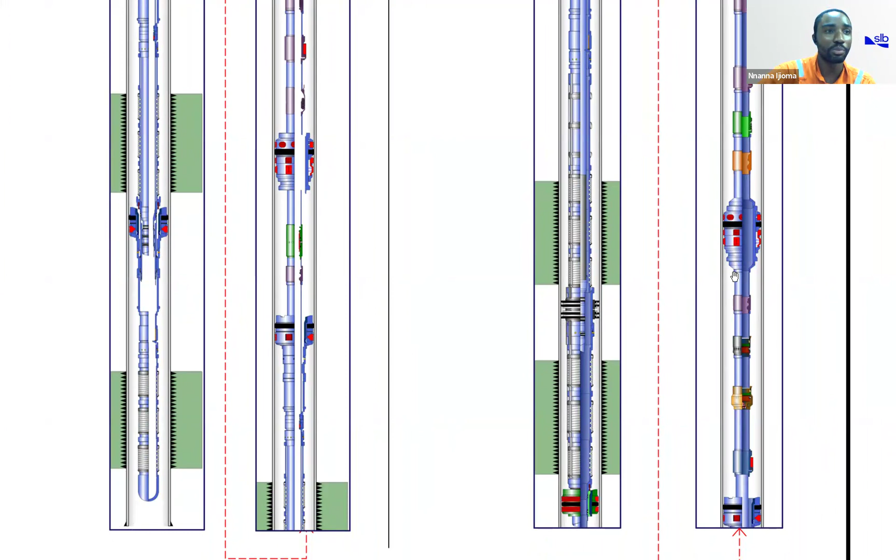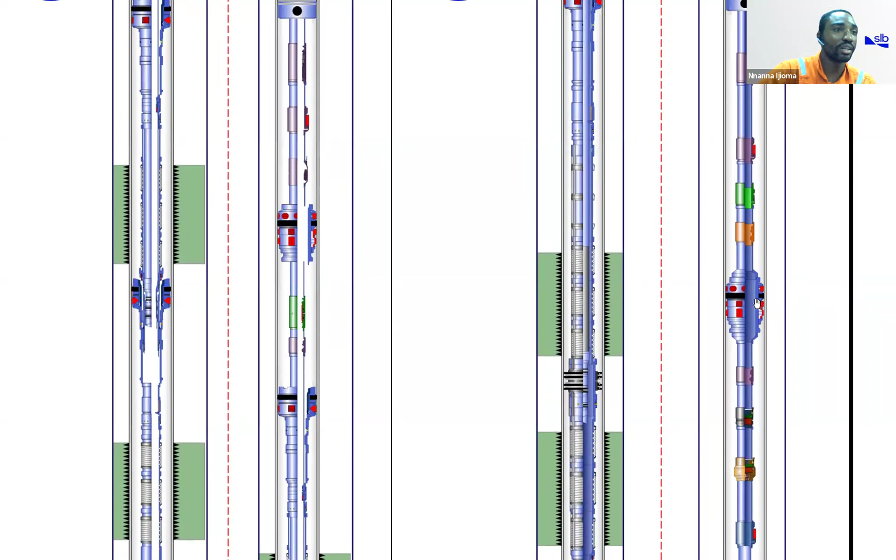Because first of all, at least I for one have probably not seen a subsea landing string with a dual string BHA. It's not even common, and even if you want to do that, it's going to cost you a lot of money. You also need to look at intervention and all of those things - it's going to be a very, very complex operation. And another thing that might determine this, again, this is subsea.

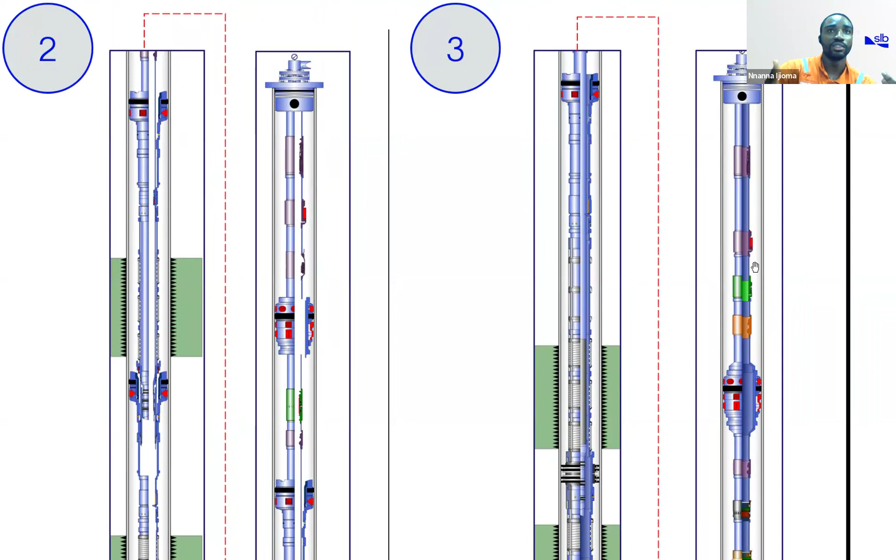Another thing that would determine whether you want to use dual string or single string, you need to check what facilities have in place or plan to have in place to offtake this well. Because if you're going with a dual string, that means you need a dual tree, so you're introducing an extra wing valve, which means the facility team needs to provide an additional intake into their surface flow line or the manifold. Did they plan for that? You actually need to consult everyone in this case.

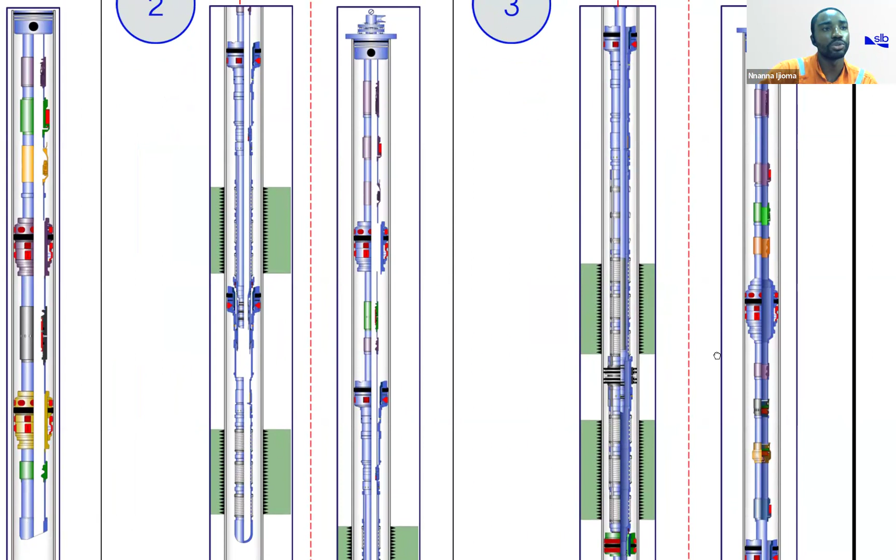So that's why during your design you need to talk to all the parties involved. The completion team, especially with the reservoir team, is there to give the reservoir team what they want. What's their depletion strategy for this well, or do they intend to suck everything out in one year? Whatever they would like to do. So again, you just need to consult everyone.

Emmanuel Iber has a gentle reminder, so I'll just take a last question. It says: please give a quick remark from the casing to the installation of the tube.

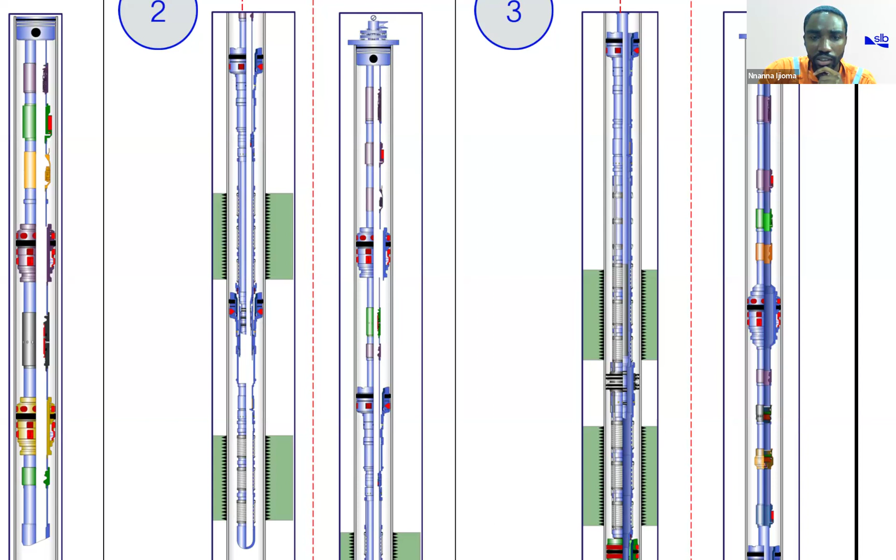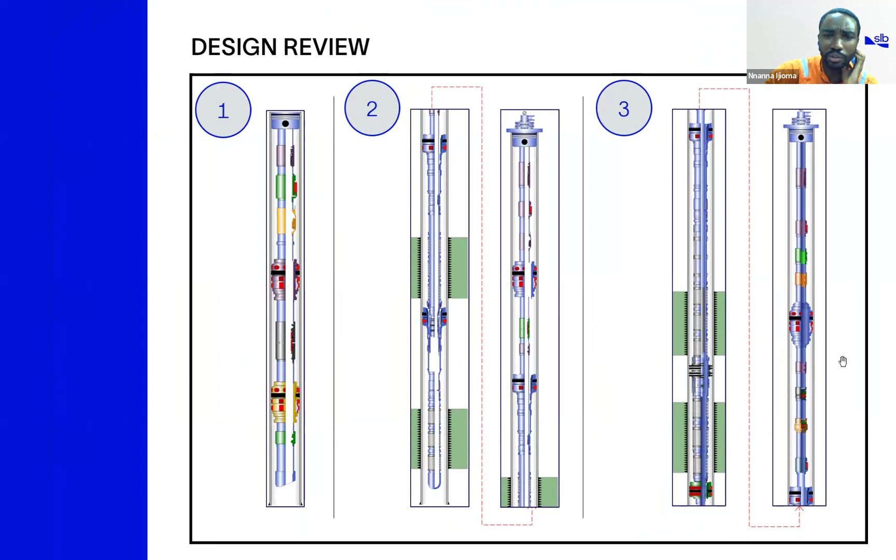I want to believe you're talking about tubular makeup. You need to ensure you have the right tubing vendor or tubular company to make up your tubes. I hope that's what you're talking about. But anyway, you need to be sure you monitor the torque values at each point in time.

So even if you're talking about casing installation, let's even talk about casing design. Ensure the casing design is right for the job, because a lot of times the person supplying your packer and other accessories might not even be informed about the casing size you're going to select. You need to ensure those two people know about the casing size, so that you do not select the wrong packer for another casing type.

Then talking about the casing installation itself, ensure you select the right thread for the job. I don't want to advertise any company here, I'm not getting free promotion, but ensure you have a premium thread. Take the opportunity to look at the various thread types, but check and confirm that you have a premium thread. This is for both your casing and your tubing.

Make sure that when installing these things, you have an approved vendor there to inspect the tubing before makeup and then inspect their torque chart, so you can be sure the tubing or casing is made to spec. Because if you don't do all of these things, believe me, you complete the job, they tell you congratulations, then they call you back in a week saying the tubing has burst, or the tubing has parted, or the casing has seepage and you're producing oil from your casing.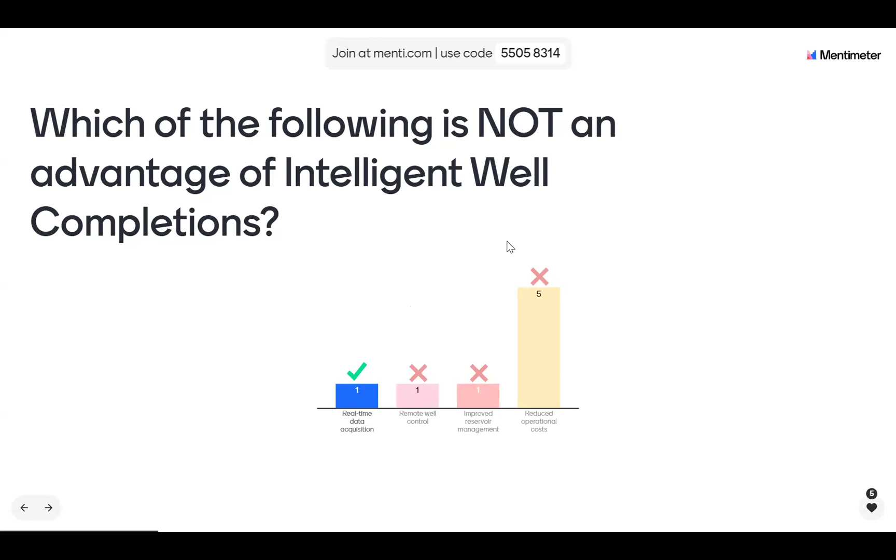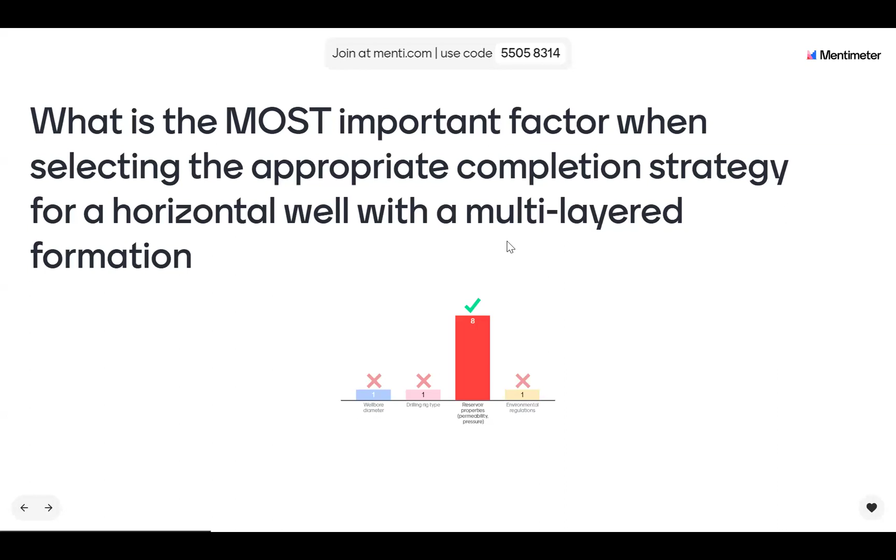Question 2, 12 players. Okay, let's see what question 2 is. Remember, fastest correct answer attracts more scores. What is the most important factor when selecting the appropriate completion strategy for a horizontal well with a multi-layered formation? The reservoir properties, permeability and pressure, is the most important factor amongst these factors here. So take notes. We have 8 correct answers and 3 wrong answers. Here's our 12th player.

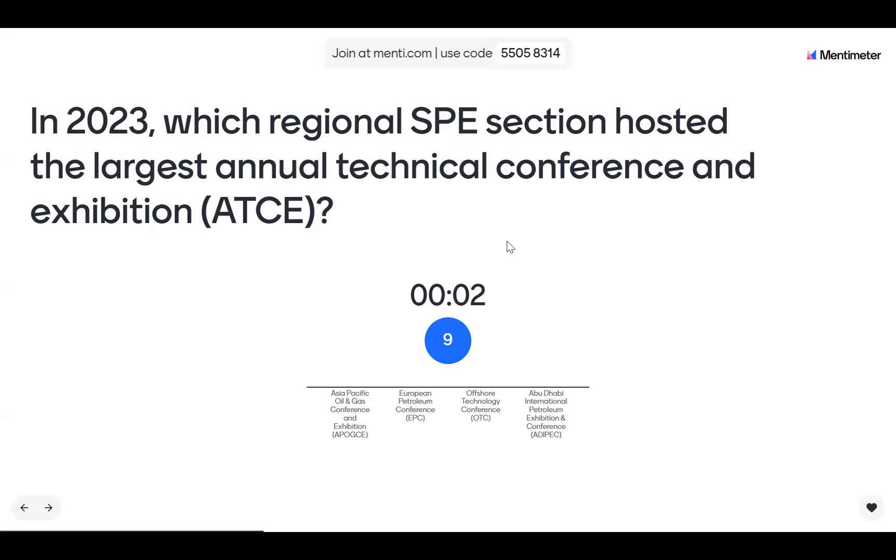Okay, 11 players. Question number 3. Let's go. Player 12, you keep coming and going. What's happening now? Oh, 13 players now. In 2023, which SPE regional section hosted the largest annual technical conference and exhibition? Is it Asia? Is it Europe? Is it the OTC or Abu Dhabi? Correct, Abu Dhabi hosted the largest ATCE last year.

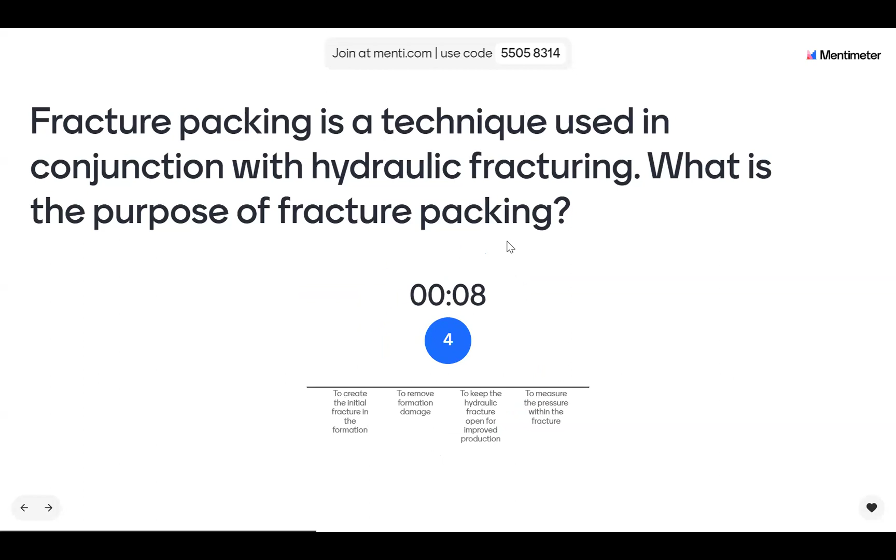Congrats to the 7 correct answers. All right, for question number 4, we have 10 players ready, 11, let's go. Fracture packing is a technique used in conjunction with hydraulic fracturing. What is the purpose of fracture packing? So we have 6 correct answers. The purpose of fracture packing is to keep the hydraulic fracture open for improved production. They call it proppant, when you prop it so that it doesn't close back after fracturing.

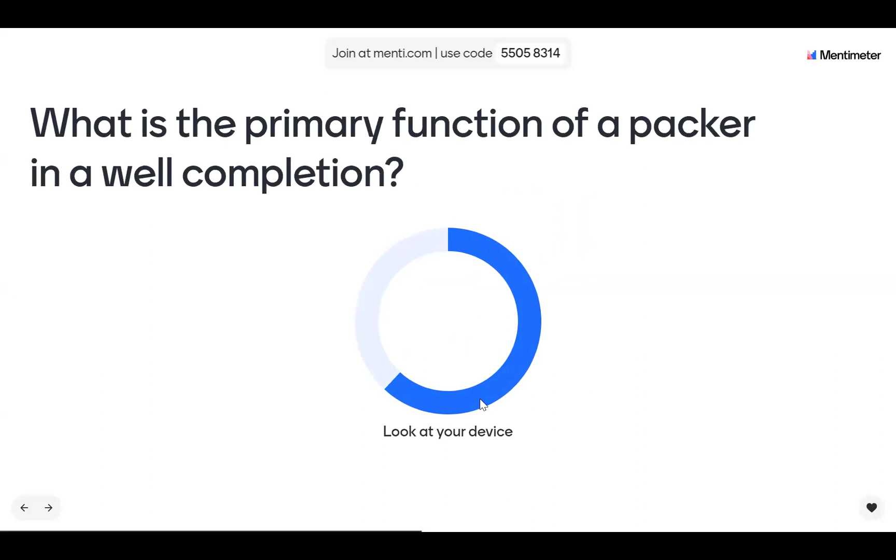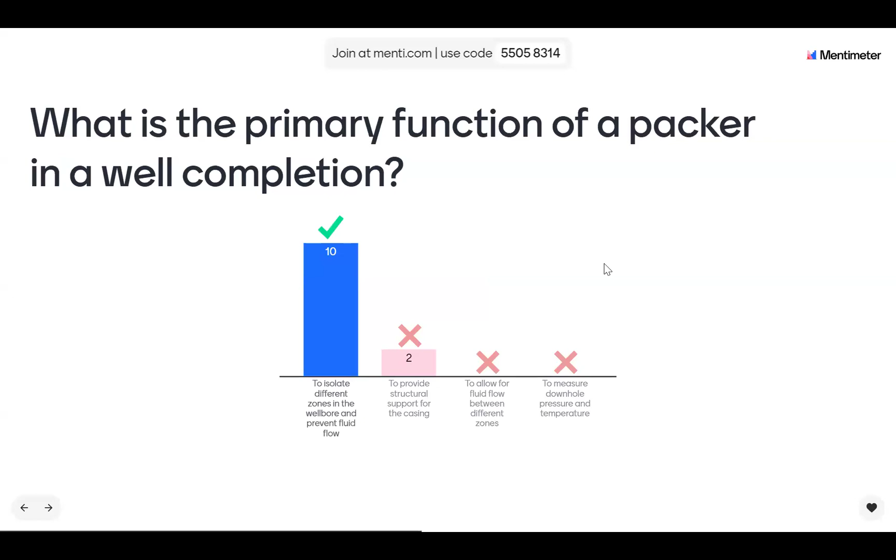Okay, so question number 5. Thirteen players, let's go. What is the primary function of a packer in a well completion? Isolate different zones in the wellbore, provide structural support for the casing, allow fluid flow between different zones, or measure downhole pressure and temperature? We have 10 correct answers: to isolate different zones in the wellbore and prevent fluid flow. I'm sure if you're listening to this presentation today, you would have gotten the answer correct.

Question number 6, we are halfway into the quiz, 13 players on the call. Let's go. What is the most important consideration for ensuring wellbore integrity throughout the completion process?

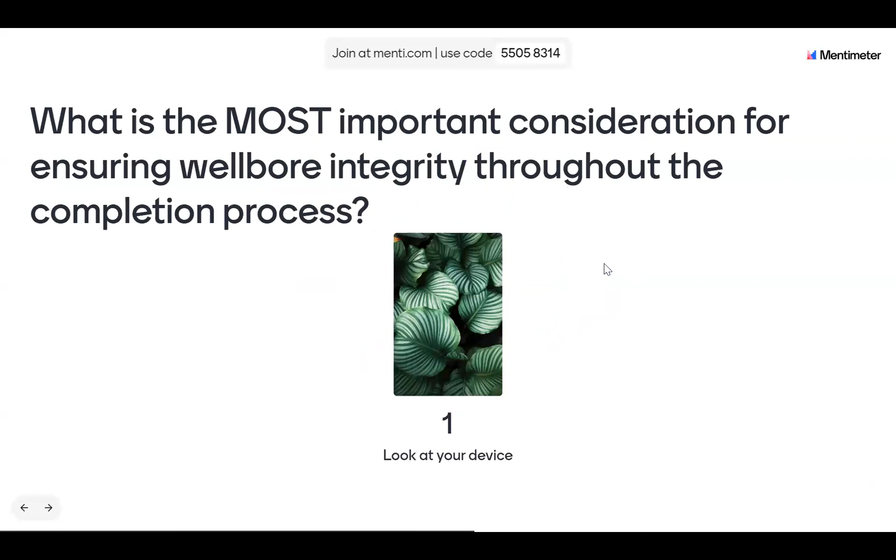Oh, what is this? Over here, I saw something like an error. Moderator, please confirm if you experienced something similar. I don't think there's any problem from my end. Okay, that's fine, so it's local to me.

All right, so the correct answer is maintaining proper pressure control during operations, the most important consideration to ensure wellbore integrity during completion. Pressure maintenance, okay.

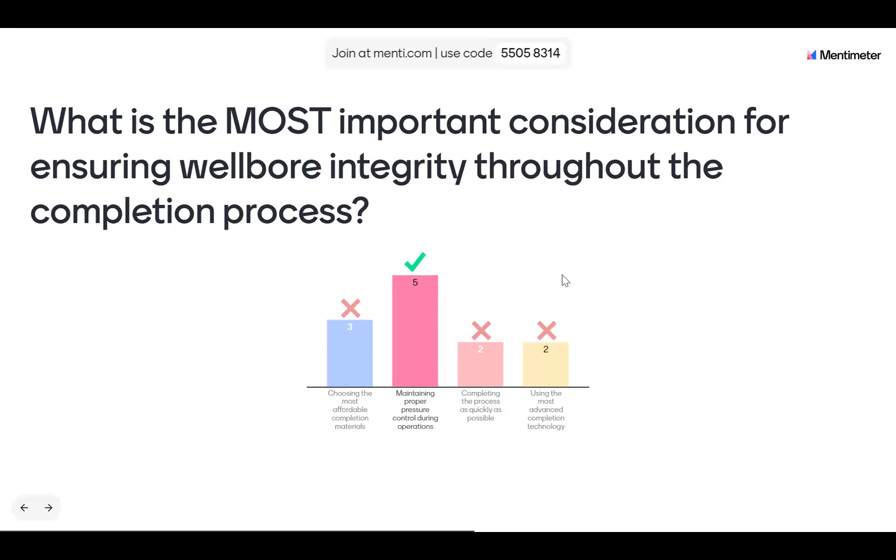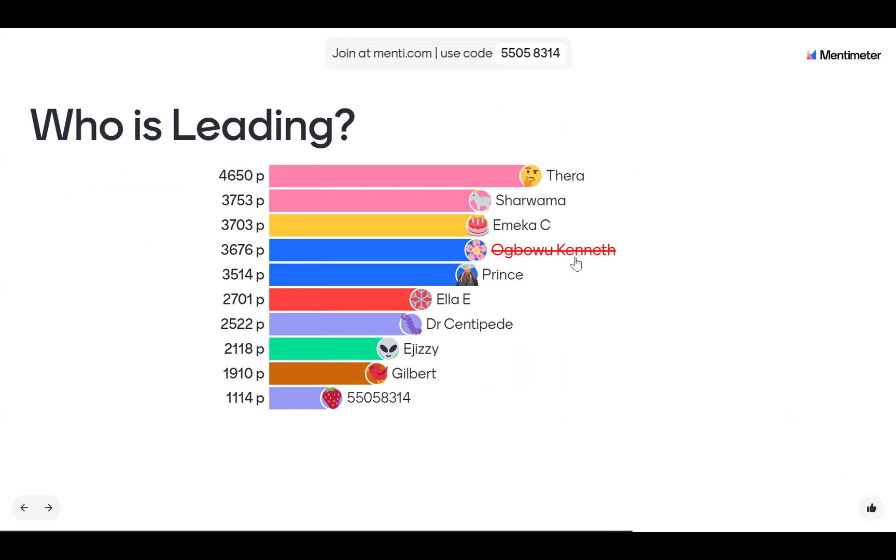Okay, let's see our leaderboard. Who is leading? Thera is leading, followed by Sharwama and Emeka. Kenneth has dropped, but there's still hope. Okay, question number 9. We've lost 3 players, 12 remaining.

Which of the following is not a typical material used for wellbore sand control screens? All right, carbon steel is the correct answer. And one person got it right.

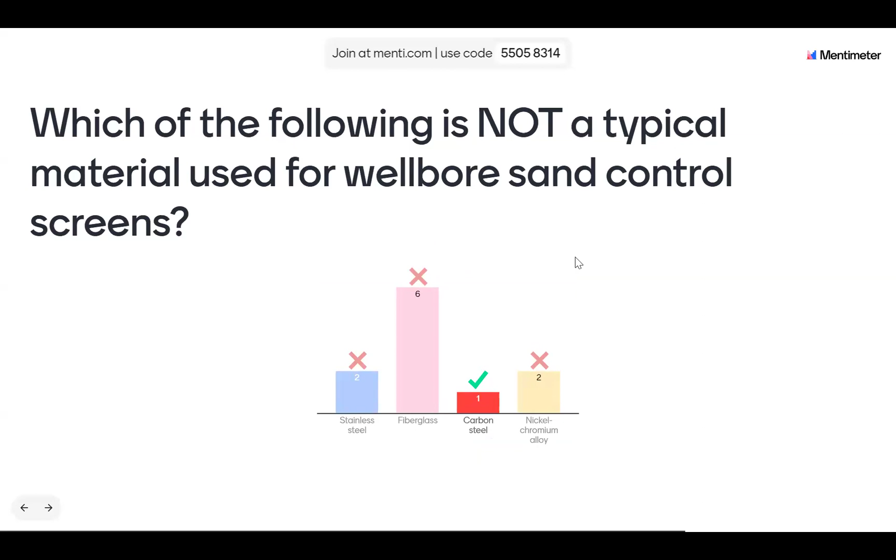Question number 10 out of 12, let's go. What is the primary purpose of the SPE Bridge program? To connect students and young professionals with mentors, correct?

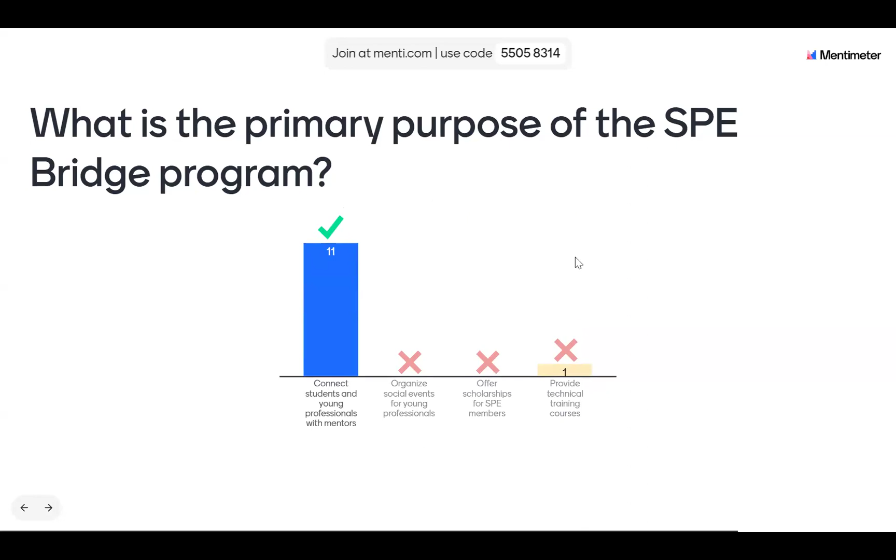Okay, second to the last question, 13 players ready. Let's go.

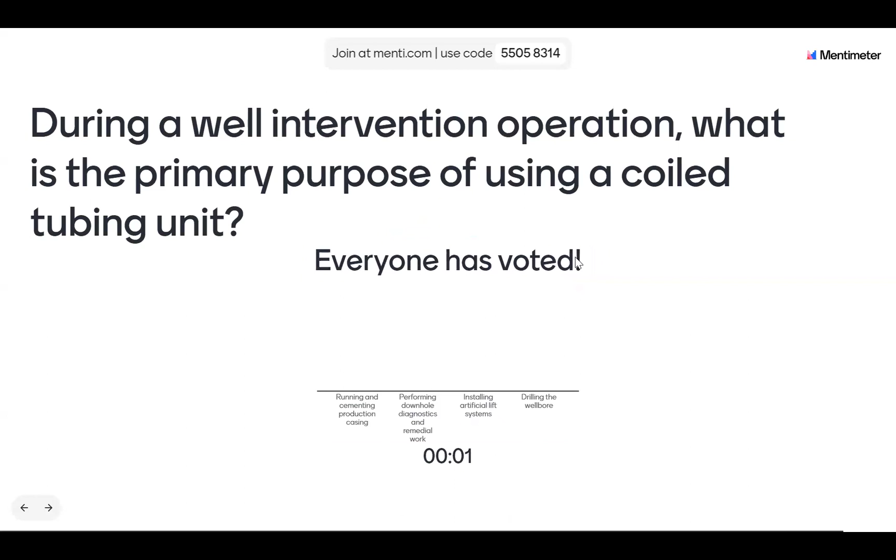Now the last question for today. During a well intervention operation, what is the primary purpose of using a coiled tubing unit? Well intervention, coiled tubing, okay, so everybody should get this one. All right, we have 9 correct answers and 3 wrong answers.

All right, so who is our winner? Oh, wow. Okay, our winner is Thera. Thera, please give us a shout out on the call. Let me quickly unmute you so you can give us another shout out. What's your name?

All right. Okay, so you can unmute and greet the house.

Hello, good evening, my name is Asma. I honestly don't know how I won, but yeah. Okay Asma, it's so nice to have you here. It's evident we have very smart people in our midst. I don't know you personally, but I know the name now. I look forward to seeing you one day.